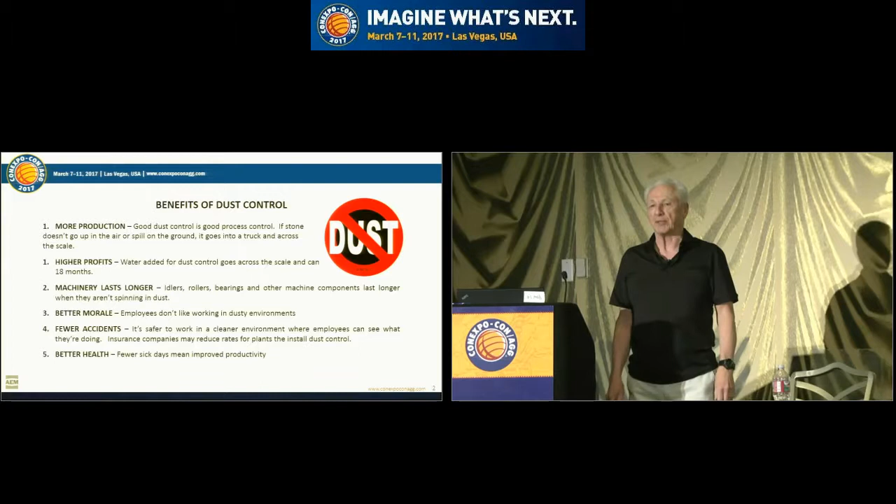First of all, you can get more production if you do this right. My belief is good dust control is nothing more than good process control. If it's not going up in the air or spilling on the ground, it's going to go into your truck, into a rail car, into a barge, and you're going to be able to sell it.

Secondly, higher profits. For example, if you're using a water spray system, that water is going to go across the scale, and that system could pay for itself in 18 months.

Machinery can last longer. I mean, you can't convince me that idlers and bearings and all those machine components run better in a dusty environment.

Better morale. I've been doing this for 30 years and I don't like going into these dusty old plants. I feel better when I got a nice, clean, safe working environment.

Fewer accidents. If you can see what you're doing, if your vision's not obscured by dust, you're going to work safer. And finally, better health. This stuff is no good for your lungs, and if you're healthier, you're going to have fewer sick days.

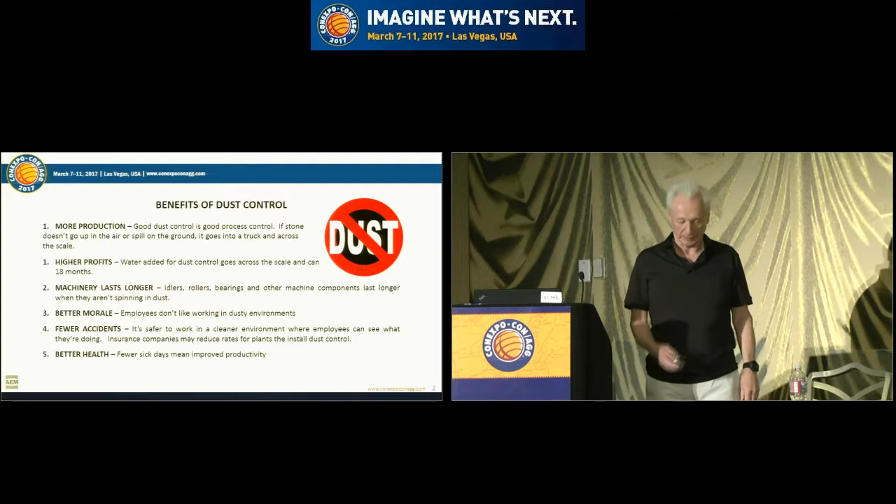So there's definitely some benefits here, and what I want to talk about today are some control methods from the point of view that good process control is nothing more than good dust control. So try to view this whole problem of dust control not in terms of complying with air quality standards, but as an engineering problem. How do you approach it from an engineering point of view? They're just two sides of the same coin.

Now, let me go back here a second. I'll tell you a story about a plant we put a system into in Missouri about 20 years ago. This old boy that owned the plant got slapped with a $40,000 fine for visible dust emissions.

So he figured he was going to sue the state. He was going to challenge their authority to regulate his emissions. Well, that didn't work out. He had to pay the $40,000 fine, and he had a $20,000 or $30,000 legal bill.

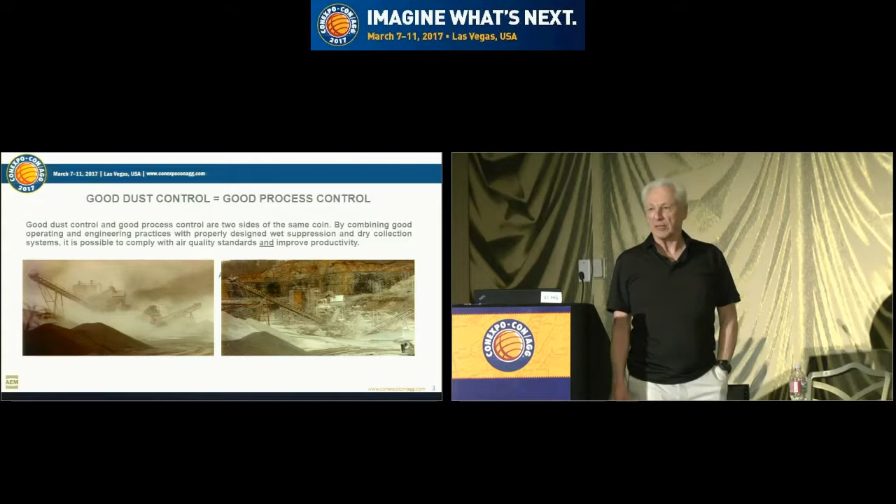And then he went to our dealer, and he said, you know what, I think I'm going to have to put one of them damn systems in. So we went down there, we installed it, and we finished up during the lunch hour. We had just turned that system on, and that plant went from looking like the one on the left to the one on the right.

So we were sitting in the lunchroom when Harlan came roaring up in his pickup truck, and he came into that lunchroom screaming, what the hell's wrong with the plant? What broke down? He said, well, Harlan, nothing broke down, there's just no dust. See, when he came back from lunch and didn't see that cloud of dust coming up from his plant, he thought the thing wasn't running anymore.

And he said, I want you guys to get the hell off my property. He says, I'm not going to turn that damn thing on again until I see the inspector coming down the road. So we said, okay, we got up, we left.

And I didn't hear from Harlan for another 6 months. I think it was March of the following year when he called me up to tell me that my damn system had broke down. He said, your pump cracked. And I said, well, the only way it could have cracked is if you guys forgot to drain it over the winter. You know, if you remember, you threw us off the property.

And not my fault if you guys didn't remember to drain the thing, but he wouldn't allow his people to touch the pump. So he wound up spending another $12,000 or $13,000 to repair the unit and finally get things in good working condition so he could comply with air quality standards.

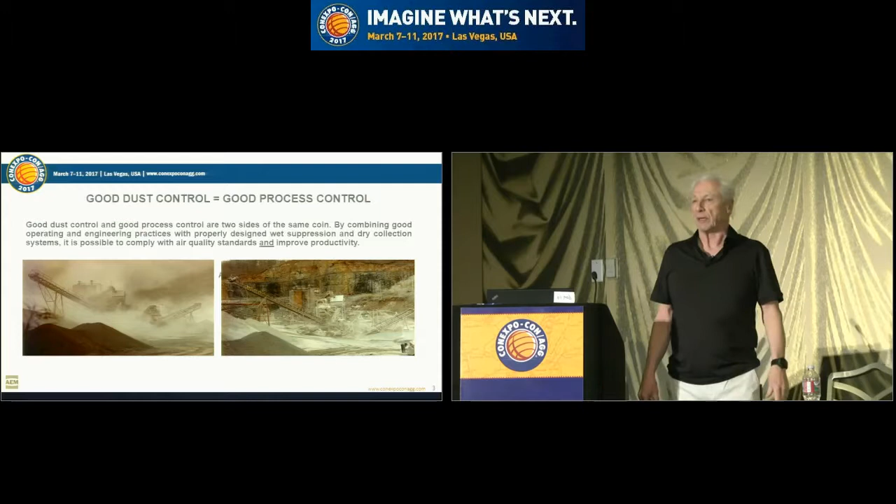So this guy wound up spending, I don't know, between fines and legal fees and the equipment, probably $120,000 to $150,000. And what I want to encourage you guys to do here today is don't wait for the last minute. Don't wait until you get that citation.

Don't wait until you get that fine, because I guarantee you'll wind up spending a lot more money than you need to on dust control. Try to get ahead of the curve. Try to develop a dust control plan.

You see that photo on the right-hand side. A quarry is a pretty complex operation. There's a lot going on there, a lot of dust sources. It's really difficult to figure out how you're going to control emissions from such a complex facility.

Where do I start? Well, the first thing you want to do is conduct a site survey. Where's that dust coming from? Get out there in the plant and list all the dust sources.

Secondly, you can estimate your uncontrolled dust emissions. How much dust would that plant produce if I didn't do anything to control it? How much dust would I get from the roads? From the piles? From the crushing and screening plant? You can estimate all that stuff and come up with a baseline of uncontrolled emissions.

And then you can sit down and put together a list of control measures, and pick the ones that are appropriate for your facility. It could be a simple enclosure, could be a spray system, could be a baghouse, could be some skirting, could be a dust curtain, whatever.

List all that stuff, and by doing so you're able to prioritize these dust sources. Your site survey and your calculations have told you which are the most prominent sources, so you can approach the problem by tackling the big, most prominent sources first and leaving the smaller ones for later.

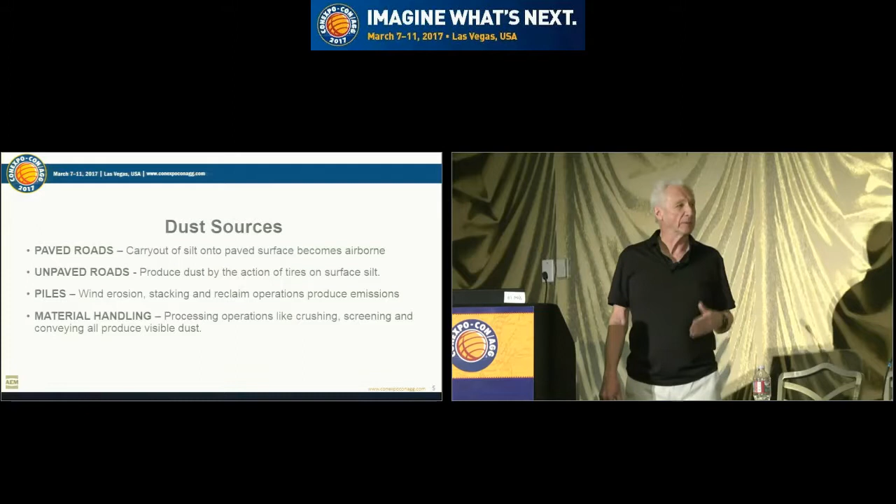Generally speaking, paved and unpaved roads account for roughly 35% of dust coming off a typical quarry property, piles for probably another 20 to 30%, and material handling for the balance. So it's a pretty even mix, but again that's going to depend upon your particular situation. Everybody's a little bit different.

Now, every state except California, I believe, allows you to use what are called reasonably available controls. And these are nothing more than common sense control measures—stuff you've read about in the literature, stuff you've heard about by coming to seminars like this, things you've learned by talking to your buddies in the industry and what they've done to control emissions.

And I've divided them here into 4 categories. First you got operational controls. All you're doing here is teaching people how to do things differently—teaching your operators how to minimize dust. Doesn't cost you a nickel.

There's a right way and a wrong way to load a truck. There's a right way and a wrong way to dump a truck. There's a right way and a wrong way to operate a crusher. If you don't do it right, you're going to produce more dust than you need to. But it all has to do with training.

You've got to get your operators to take personal responsibility for controlling dust, and this can really make a big difference. And it doesn't cost you anything.

Number two are engineered controls. These are generally things you can do with in-house labor and material. By engineered controls, I mean controls that enable you to enclose and contain dust sources. You can get some old conveyor belt and steel sitting in your boneyard that you can use to button up a transfer point, patch up a couple holes, or improve the skirting on a transfer point. All that stuff can make a real big difference.

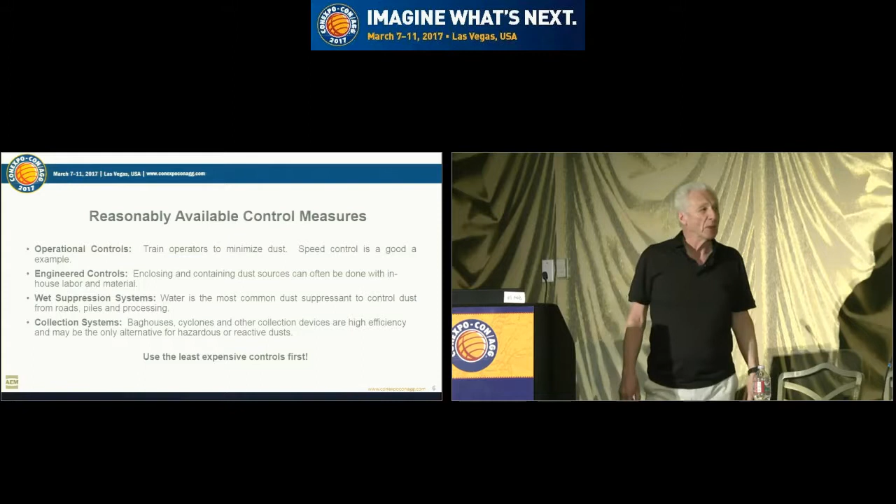Wet suppression systems - water is the most common dust suppressant used to control dust from roads, piles, and all kinds of processing operations. And then at the top of the heap, the most expensive, you've got collection systems - bag houses, cyclones, other collection devices. They are very high efficiency, and they may be the only alternative for hazardous or reactive dust. But these are the kinds of things you don't want to have to do unless you have to.

So let's take a look at reasonably available control measures for each one of these sources. First, let's take a look at paved roads. Number one, housekeeping - keep the roads clean. If something gets spilled on them, clean it up before it gets tracked off the property. What you want to try to do is prevent carryout. The reason you're getting dust emissions from that paved surface is because that surface has gotten dirty.

Carryout from unpaved roads - vehicles track material out onto that paved surface. So some of the things you can do from an operational point of view: you can restrict access to paved roads. If you've got five or six unpaved roads coming into a piece of paved road, see if you can narrow that down to two. Try to restrict the types of vehicles you have traveling on the road.

Rumble grates can be used to loosen and remove rock with that transition when you're going from an unpaved to a paved surface. And we'll be talking a little bit later about wheel washes, how they can be used to clean truck tires before they enter the paved surface.

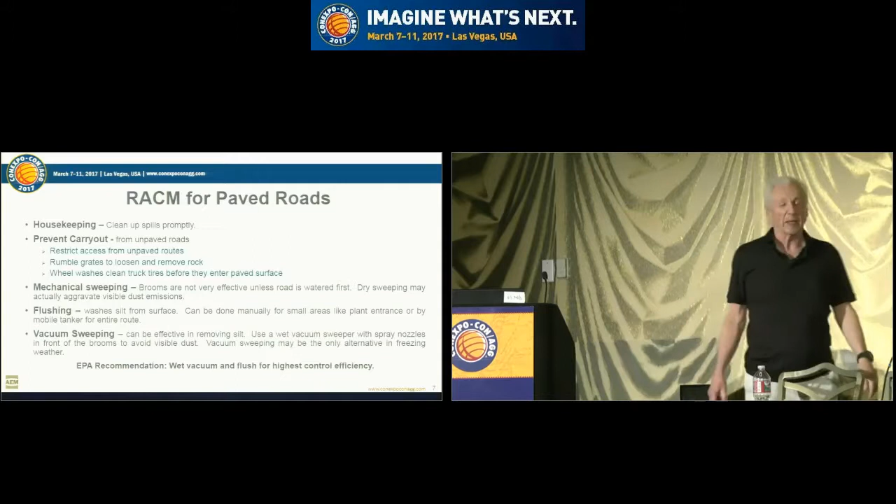Mechanical sweeping - brooms and that type of stuff really aren't very effective unless the road has been watered beforehand. Dry sweeping can sometimes actually aggravate visible dust emissions. Flushing washes the silt from the surface. And I'm not talking about having a tanker with a spray bar wet down the surface - I'm talking about actually flushing the silt off the surface. If you just water down that paved surface, as soon as that water evaporates, that silt's going to remain there. You want to try to flush the silt from the surface.

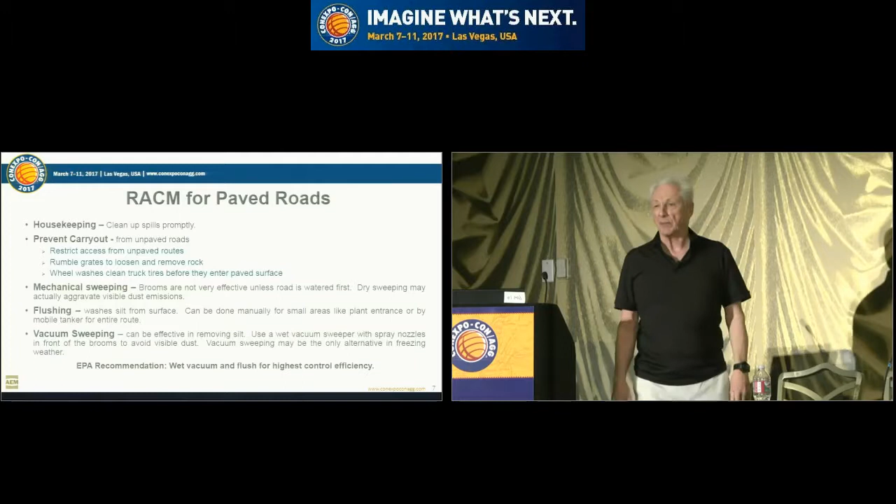That can be done manually for small areas, like maybe a plant entrance, or with a mobile tanker. Vacuum sweeping is the most effective method. Probably a lot of you folks already employ a contract sweeper - it comes around, does your roads, with little brooms out in front and a couple of spray nozzles to keep the dust down. In vacuum sweeping, if you're in a cold weather climate, like my area back in New York, it's probably the only alternative in cold or freezing weather. What the EPA recommends is wet vacuum and flush for the highest control efficiency - that'll give you, I think, 97 to 98% control efficiency on a paved surface.

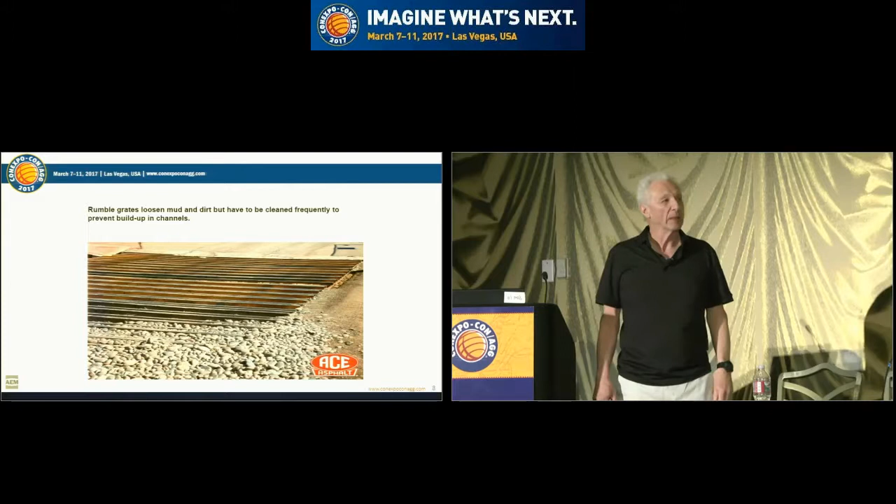Down here in Southern California, they passed a rule several years ago called Rule 1157, where every affected facility had to install a rumble grate and a wheel wash. Problem with that rule was it didn't say it had to work. So a lot of guys put in these rumble grates, but they never kept them clean, and they still complied with the letter of the law. You just dig a little hole and fill it with water - you've got a puddle of water, and you're basically in compliance. There's no performance standard.

But it depends on the area you're in. If you're out in the middle of nowhere, maybe you don't need to do anything. Maybe you're in an agricultural area where the farmers are tracking out more stuff than you are. If you're in a metropolitan area, though, you can be really under the gun, and you may have to install a wheel wash.

There's two basic types. Number one, you got basins. Vehicles drive through a flooded basin. These can work well as long as they're properly maintained, and you got a way to clean out that basin to keep rock and silt from accumulating. The two biggest problems with this are keeping them clean and recirculating the water. If you're not able to recirculate and clean up that water, you wind up washing with muddy water, and it just don't solve anything.

Second type would be a pressurized spray system. Vehicles drive through some sort of wash zone. Sprays could be anywhere from 40 to a couple hundred pounds of pressure. There's all kinds of designs for these wheel washes. Water can drain to a storm sewer, retention pond, or some other kind of basin.

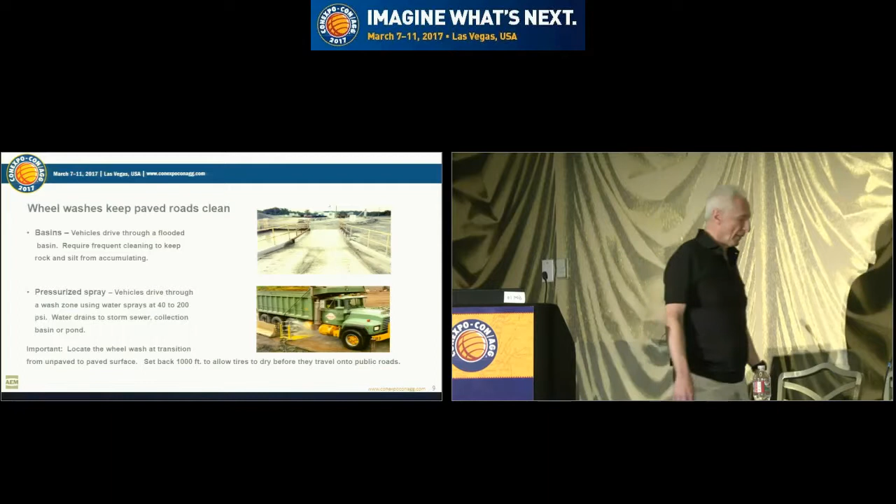All of these wheel washes work. The biggest problem with these wheel washes are, number one, getting the trucks to drive through them. If you're going to put one of these things in, you got to make sure there's no way a truck can get around them, because they will. Number two is keeping their speed down, because these guys will go through there as quick as they can. And if they just blow through a wheel wash, you're not going to be able to do a very efficient job of washing it. And then number three, you want to try to locate the wheel wash as far back in the plant as you can.

If you have a scale house that's 800 to 1,000 feet back from the public roadway and you got paved road from that scale out to the public road, those tires that get washed in that wheel wash, they're going to be dry by the time they get out onto that public road. On the other hand, if your scale is right there and it's 50, 60 feet to the plant exit, you're going to track out a slick of water. I mean, the tires are going to look visibly clean. That slick of water is going to get tracked out of the plant and maybe extend for a couple hundred feet on either side of the plant exit.

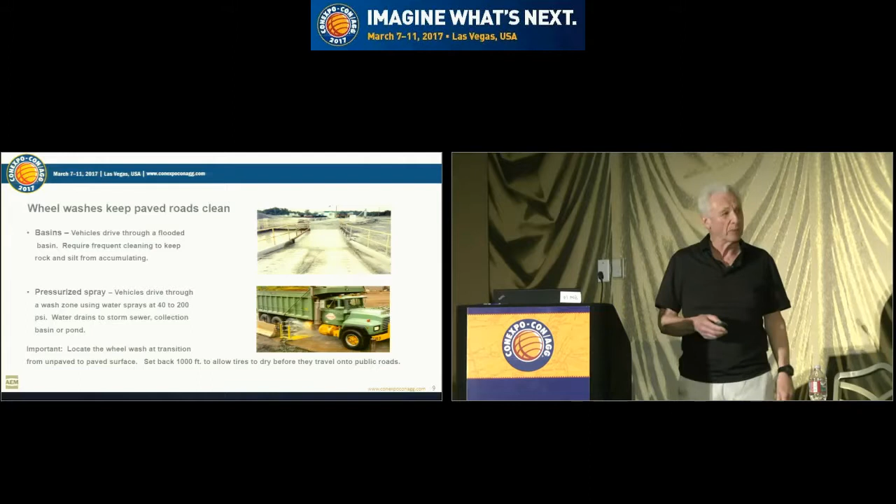When that water dries, it's going to leave behind this microscopic silt, and then passing traffic is going to cause that to be re-entrained. So when you drive up to the plant in the early morning or in the evening when the sun is behind that stuff, it can look pretty nasty. So try to locate that wheel wash at a transition point from unpaved to paved surface. Once those truck tires are clean, you don't want them going onto an unpaved surface. So once they're clean, they got to stay on pavement. And again, try to set them back about 1,000 feet, 800 to 1,000 feet to allow tires to dry before they travel onto a public road.

Some folks use flocculants. That's fine. All this stuff works. The big problem, again, is maintenance.

Okay, unpaved roads. Speed control. Lower speed means less dust. It's just common sense. Here's an example of an operational control that can really determine whether or not you're going to have a problem with your unpaved road surfaces. For haul vehicles, it can be kind of tough to keep speeds down. You've got to get them up to the primary crusher in a certain period of time or you're going to run out of rock.

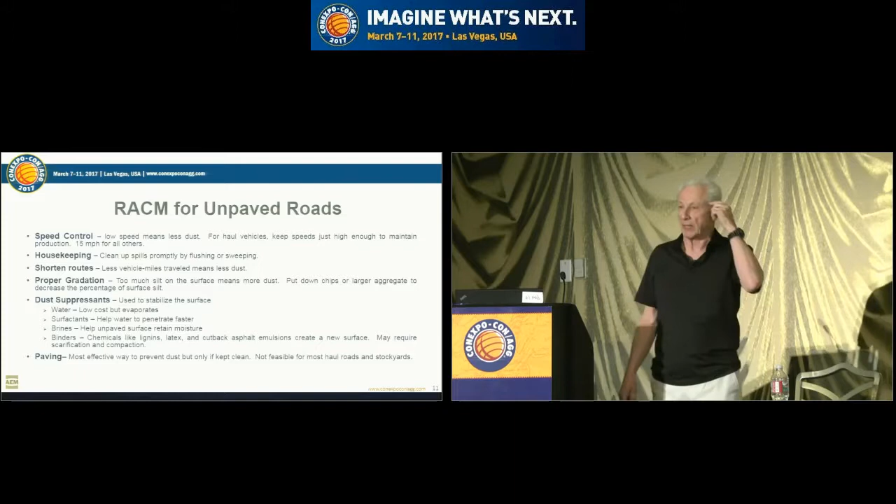On the other hand, I've been in plants where I've seen guys load up at the face and blow 45 miles an hour down to that primary crusher with a trail of dust behind them, and then they'll sit there at that crusher for 5 or 10 minutes waiting to unload. You got to train those guys. Keep your speed less than 15 miles an hour if it's possible.

If you don't have enough trucks, try to do the best job you can. Housekeeping, again, even though it's an unpaved road, if you spill something on it, try to keep the road clean and free from spillage. Shorten the routes. If there's any way you can shorten the routes that trucks travel in your plant, that's going to mean less vehicle miles traveled, and that's going to mean less annual dust emissions over a year's period.

Proper gradation, this is something that's often ignored. The reason you got a problem with visible dust from a road surface is because there's just too much silt, too much minus 200 mesh material on that surface. Maybe you could put down some chips or some larger aggregate that would decrease the percent of silt on that surface, and that might just solve your problem.

If you still got a problem after doing all that, then you can take a look at dust suppressants. So again, we're trying to move from low cost, low efficiency to more expensive stuff. To the extent that you can control speeds, you've got good housekeeping, you've shortened the routes, and you've taken a look at gradation on your road surface, you can decrease your reliance on dust suppressants.

Water is the workhorse of dust control on unpaved roads. Low cost, but it evaporates. If you're in the Gulf Coast area, in Houston, where the humidity can be 80, 95, almost 100%, you can water a road and it might last all day. If you're out here in Las Vegas and it's 118 degrees, that water's going to be gone in an hour, hour and a half, and you might have to have a water tanker going around that plant continuously to keep the dust down.

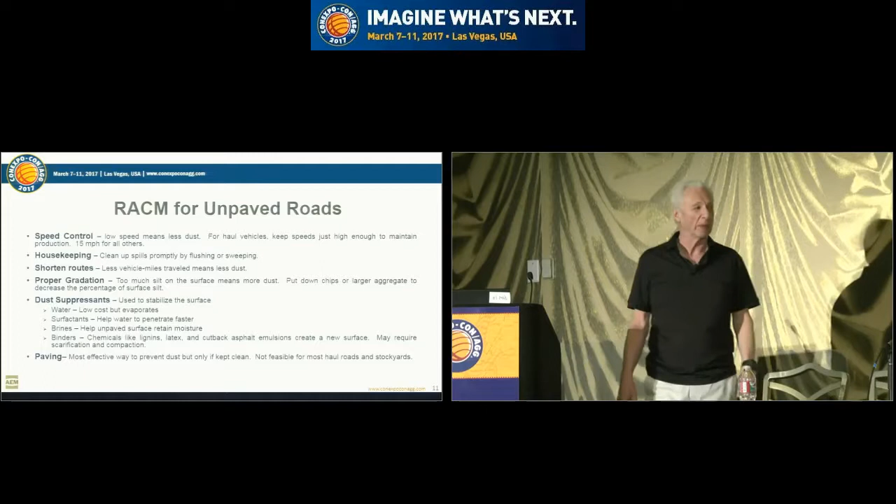Cutback asphalt emulsions really work pretty good. I just encourage you to contact your state DOT. A lot of the DOTs have a list of approved dust suppressants. If there's any way that you can use a waste product, if you're in a major metropolitan area where you've got some steel mills or a pulp and paper mill, maybe you can get some waste product that would be suitable as a road dust suppressant. There's all kinds of vendors that sell these chemicals.

It's a very competitive market. If you're thinking about using an additive, it might pay to have one of these vendors come in and do it. Maybe they give you a free trial for a couple of months, and then you bring another vendor in for another couple of months. You might go for a year or two doing free trials until you find a product that's going to work for you.

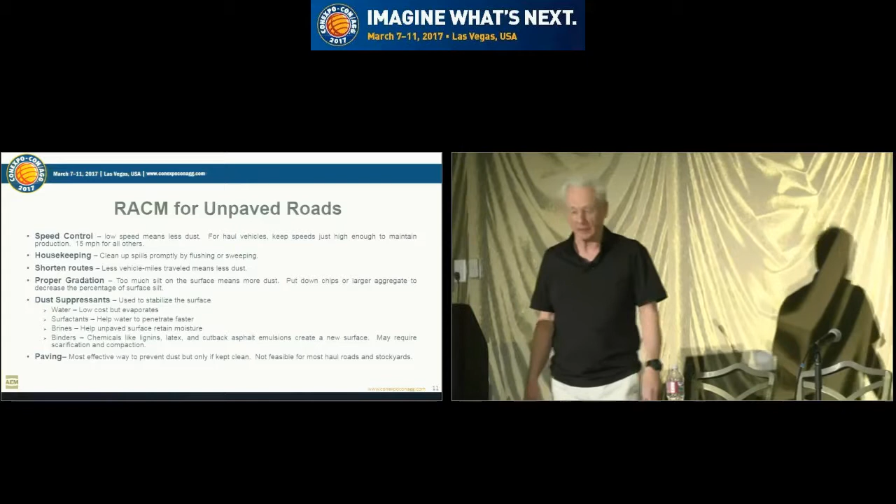If none of this stuff works, you're going to have to pave it. That sounds a little extreme, but it's been done. There's a quarry in Newington, Connecticut that sits right in the middle of the little town, and they had all kinds of problems with their neighbors, so they wound up paving that whole quarry. If you're driving in there to pick up stone, you're on pavement.

All the piles got concrete barricade blocks around them to prevent material from spilling out onto that paved surface. If you're loading up there, the loader comes over to the pile, takes a cut and lifts his bucket, and if they see visible dust, that operator's instructed to call the water tanker, who'll come down and water that pile before they load the truck out. It can get pretty nasty depending on who your neighbors are.

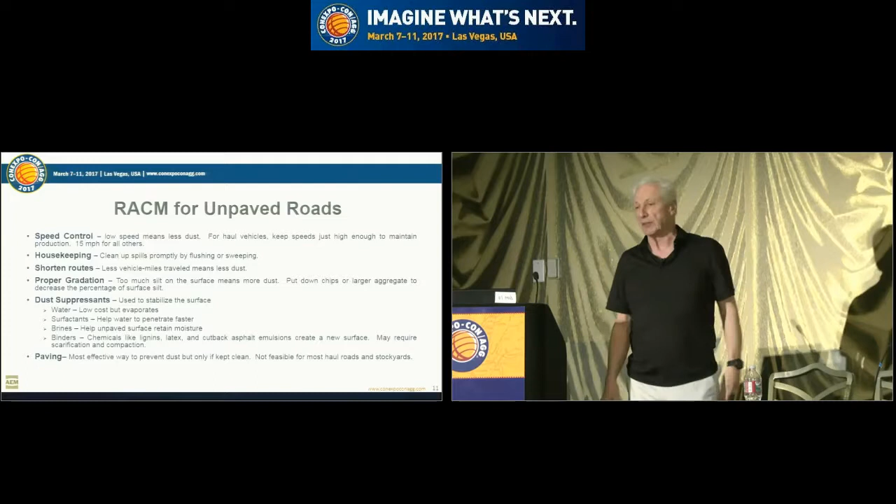Obviously paving's not feasible for haul roads and most stockyards. That quarry up in Connecticut is the only one I've ever seen pave their yard area. Higher silt contents and higher vehicle speeds increase visible dust, so again, it's important to take a look at the gradation of that road surface and train your operators to keep those speeds down.

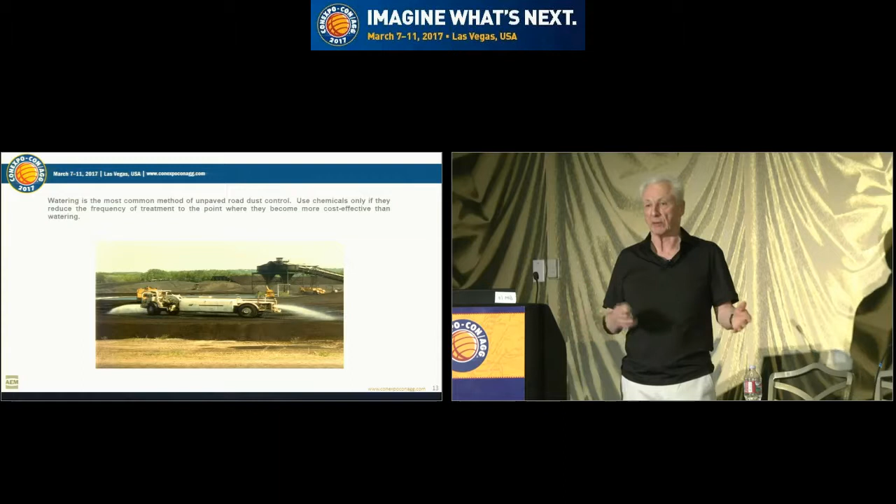Watering is the most common method of controlling road dust. If you're thinking about using a chemical, I'd encourage you to take a look at whether or not that chemical can reduce the frequency of treatment to the point where it becomes more cost effective than water. You can calculate how much you're spending to have a guy in a tanker go around and water those road surfaces. If you can find a chemical that can reduce the amount of treatment to the point where it's more cost effective than water, then it makes sense to use it. And if it can't, then it doesn't. So it's all a matter of economics.

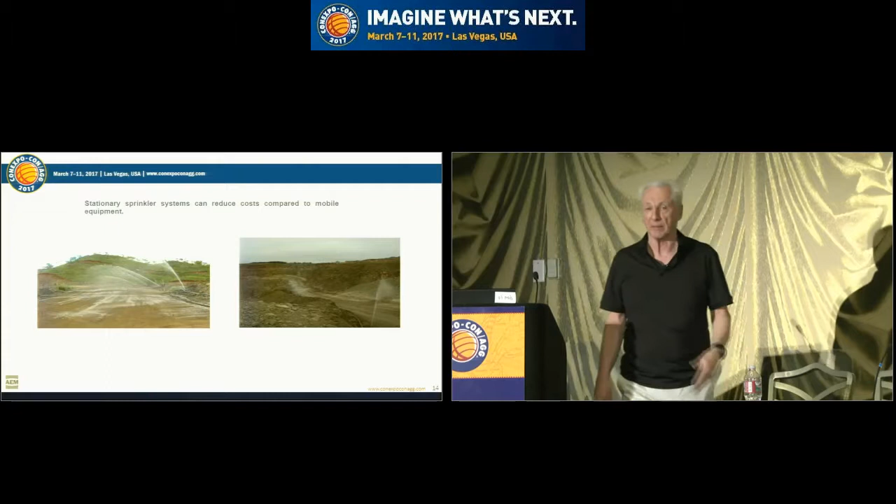I see more and more people going to stationary sprinkler systems. It could cost you 60, 80, 90, maybe even $100,000 to have a guy in a mobile tanker driving around that plant all the time. More and more folks have gone to these stationary sprinkler systems. As you can see from these photographs, they're not anything fancy. Luck Stone in Virginia put in a couple of these, very sophisticated, and they work well, and they pay for themselves. You eliminate that water tanker, and now you've got an operator who can get on to some more productive work.

Control measures for piles. Number one, you've got methods to protect the pile surface. And again, training: instruct operators to minimize dust. If you're loading out a truck, you go into that pile, get that loader bucket in there, and lift it up.

Then let it sit there, let that material spill back on the pile. You don't want to overload that bucket and race over to the truck, spilling stuff everywhere before you dump it in. Try to do it carefully. It don't sound like it's going to make much of a difference, but believe me, it does. Your operators have got to take personal responsibility for minimizing dust. We usually find that it's also better to dump into a truck as quickly as you can, because in the aggregate, you actually get less visible dust, less emissions up into the air.

Minimizing pile height is another example of what I call an operational control measure. If you can keep those pile heights less than 10 meters, about 33 feet, you're going to have less wind erosion. Once you get over 10 meters, you get into what they call the winds aloft, where wind speed is very much accelerated and wind erosion is aggravated.

Engineering-wise, if there's any way you can shelter that pile from the wind, if you can put it down in the pit or on the lee side of a hill or a berm, that's going to reduce wind speed across that pile surface, and that's going to help.

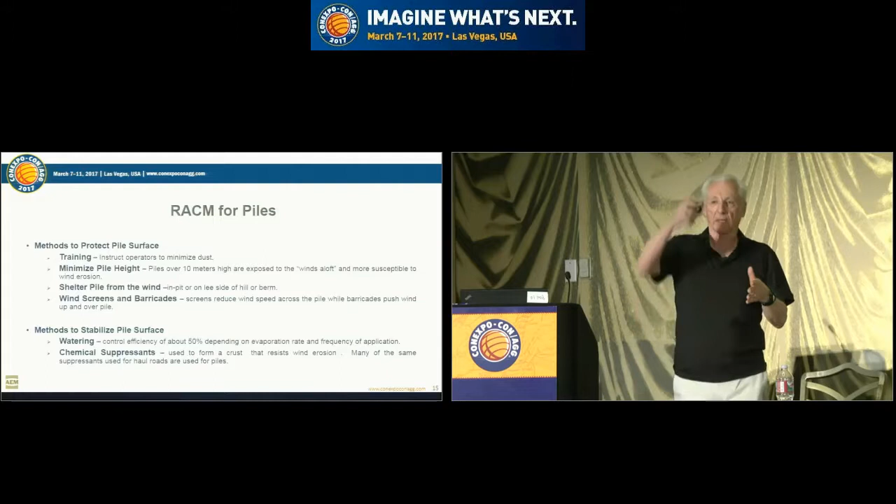Number two, you've got methods to stabilize the pile surface. These are the same kind of control measures you'd use for unpaved roads. You can water the pile down, but control efficiency isn't very high because in most aggregate processing operations, these piles are really active, and that also limits your ability to use chemical suppressants.

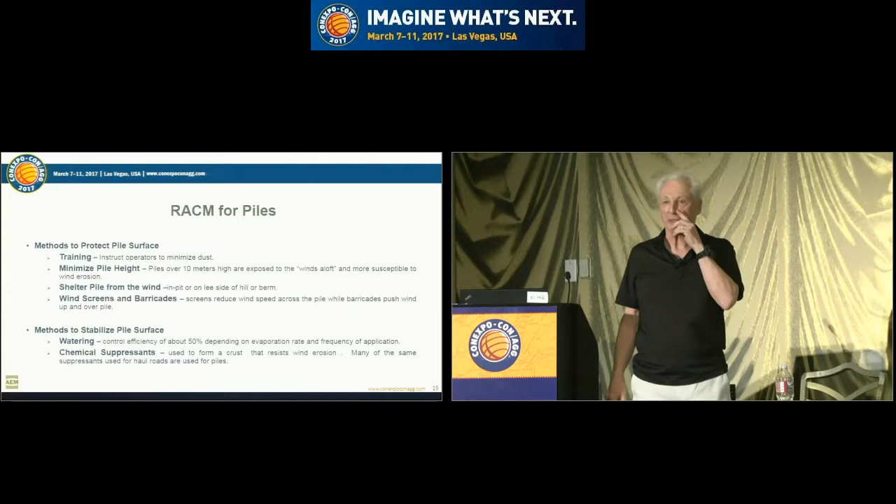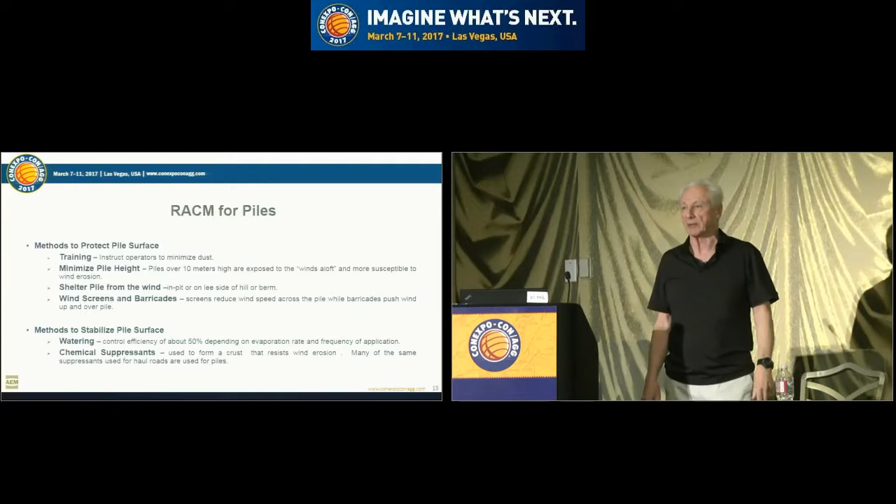Coal plants, for example, power plants, can purchase coal and put it into dead storage for 10 years. They'll slap a bunch of binders on the surface and seal it against wind erosion, but you can't do that in most aggregate plants because those piles are too active. On the other hand, I've seen some plants with enormous piles of fines, screenings they can't get rid of - that can be a real problem with wind erosion. If you've got a situation like that, it might be worth looking at some chemical suppressant to permanently coat that surface. I've even seen people hydroseed them, grow grass and weeds on them to keep the dust down.

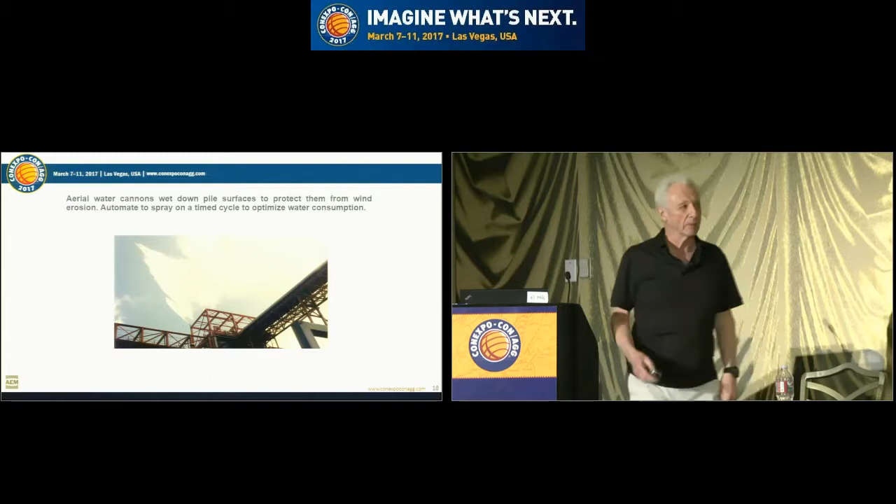The problem with these things is when you need them most, they're least effective, and that's on a windy day. You get wind speeds up above 15, 25 miles an hour, how are you going to keep that fog targeted on the pile? Maybe you have to use an array of them. I don't know, but it can be difficult to use these things on a windy day.

They were originally developed for demolition work. If you're taking down a hospital or a department store or an apartment complex, and you've got your hammer banging that stuff down, they use these things to control dust during demolition activities. That was where these things got their start, and they've been generalized to include other applications like piles.

Okay, so that takes care of roads and piles. Let's talk about material handling and processing.

Again, the first thing you want to do is implement good operating practices. Train operators to take personal responsibility for minimizing dust. I cannot emphasize how important this is.

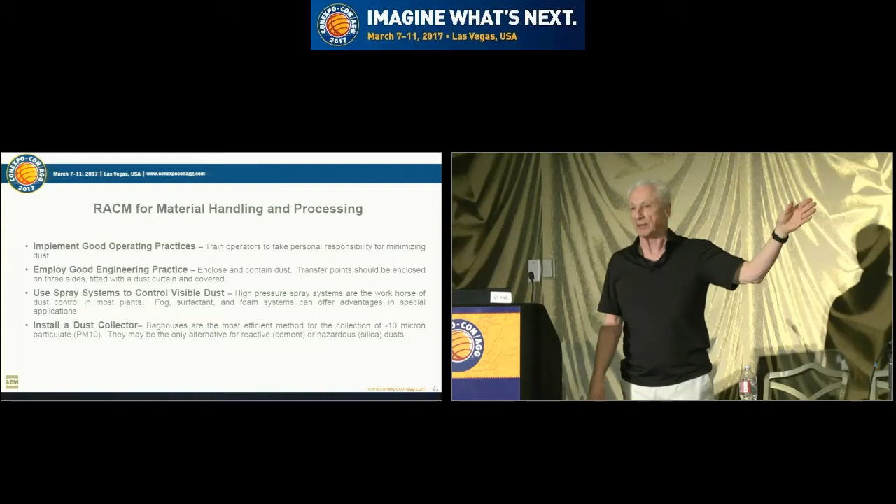So I'm standing there with the plant manager, and we're watching this thing work, when all of a sudden this big puff of dust goes up behind one of the warehouses. Well, what the hell's going on there?

It turns out some truck driver came in there. His buddy was the loader operator. He didn't want to wait in line to go through that enclosed facility, it just took too damn long. He was in a big hurry, so he said, why don't you just meet me in back of the warehouse over there? I just need a little bit of stuff, you just load me up and I'll get the hell out of here.

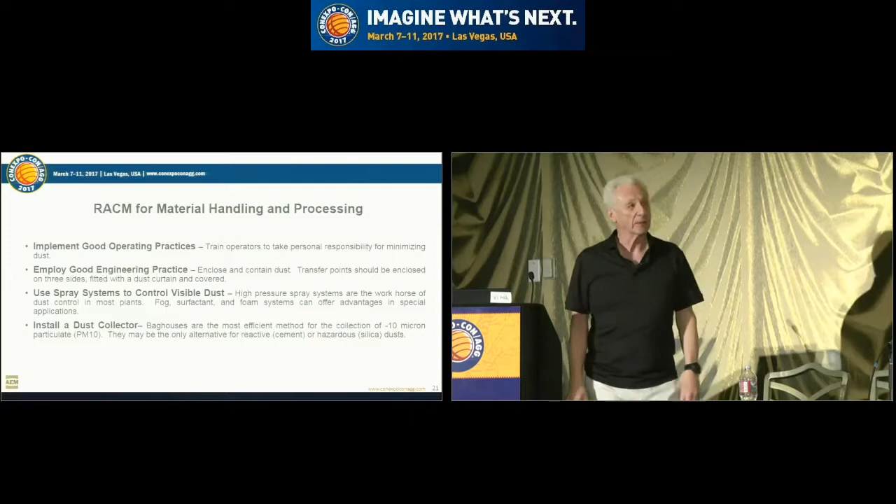So they did. The only problem was an inspector from the Pennsylvania DNR just happened to be driving past the plant, and he spun in there and wrote him a $10,000 ticket. They'd done everything they were supposed to do, spent all the money they were supposed to spend. They complied in every way with that consent order. But they had an operator that was just dumber than a box of rocks, and he decided he wasn't going to do it. And that's 10 grand.

All because they had an operator who didn't take personal responsibility for minimizing dust. So it can make a big difference.

Okay, good engineering practice: enclose and contain dust. Transfer points should be enclosed on 3 sides, fitted with a dust curtain, and covered.

Once you do all that from an operational and engineering point of view, then you take a look at spray systems to control visible dust. There's high pressure spray systems, these are probably the workhorse of the industry. You've got fog systems, surfactant systems, foam systems. There's a lot of different stuff out there. All this works as long as you've selected it for the appropriate application.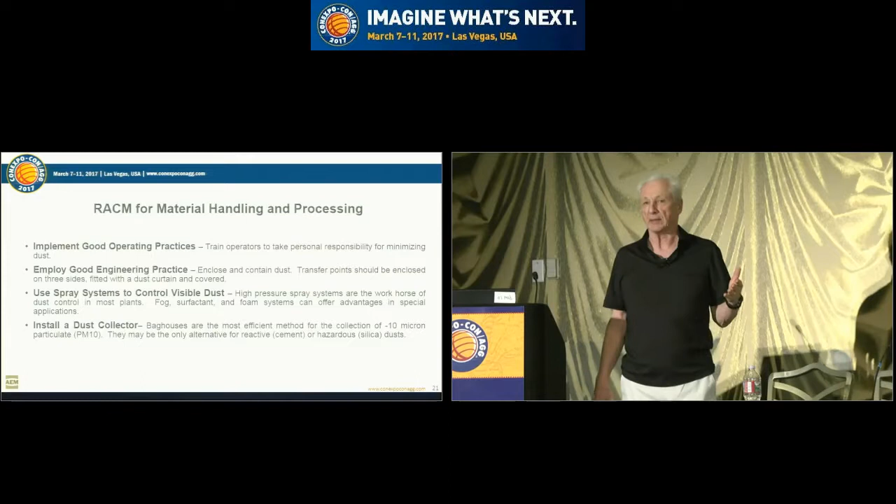And then finally, if none of that stuff works, you might be stuck with a dust collector. Bag houses are the most efficient method for collecting the -10 micron, the PM10, the respirable dust, and they may be the only alternative for reactive or particularly hazardous dust. Like if you've got a material with a real high silica content, you may have to use a bag house because it can be a very hazardous dust.

Now believe it or not, good dust control and good process control are not mutually exclusive. Good operating practice can help to minimize dust and actually improve production. Here's 2 examples. Number 1, choke feed crushers. Crushers make a lot less dust when they're choke fed. Good for production, good for dust control.

And this is particularly true of impact crushers, especially vertical shaft machines. Now, if you've got a vertical shaft machine that's running 30-40% of capacity, it's just a big fan, and it's almost impossible to knock that dust down. So try to choke feed these crushers, just jam as much material as you can through them. Good for production, good for dust control.

Number 2, try to avoid interruptions in process flow. I've seen some plants that are just like Frankenstein plants, just a big mismatch of equipment. You got an impactor that's got a capacity of 800 tons an hour, but you got a really good deal on that scalping screen, and it's only rated for 300 tons an hour. So there's the bottleneck, now you got to run that impactor at 300 tons an hour when it really wants to see 800, and it's just blowing dust. So maybe you're going to shut that down, maybe you just run a bunch of material through there.

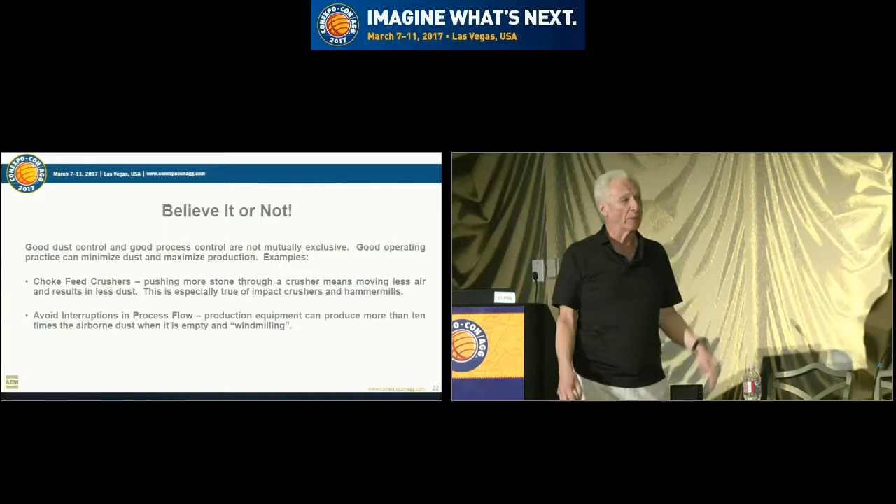And when it runs out, you wind up with equipment that's windmilling. When equipment is windmilling, when those impactors are running empty, usually you see this when you can't get rock up to a primary crusher in enough time.

You've got a primary impactor, you only got one truck. He comes up there and dumps a load of stone through that machine, then there ain't no other truck for maybe another 8 or 10 minutes. And all that time, that crusher's just spinning, and emissions can increase tenfold when that machine is windmilling.

So try to avoid interruptions in process flow, okay? And again, that's good for production. You want that plant just to be humming along.

Good engineering practice. Here's some examples of enclosures. You want to enclose transfer points on 3 sides and put a cover on it. You want to have a dust curtain at the discharge to a conveyor, and you want to install dust skirts that provide a nice tight seal to the conveyor. You may have to use dual skirts in some instances.

Landscaping, I think this is something that's often overlooked. I think one reason you see more people putting the plants in pit is because they're out of sight, out of mind. If the public can't see them, they're not going to complain about them.

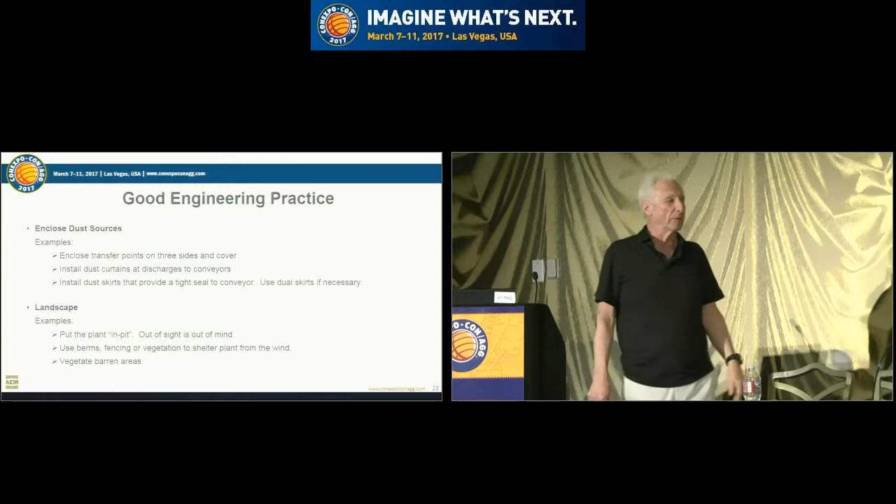Again, you can use berms, fencing, or vegetation to shelter the plant from wind. If you're putting in a new plant, take a look at the topography you're dealing with. Is there any way you can arrange that plant so it's going to be somewhat sheltered from the wind? And then you can also vegetate barren areas.

Out here in the desert Southwest, you get these little dust devils. If you got areas in the plant that are barren, maybe just dump some aggregate on top of them, or maybe you can find something that'll grow there to help stabilize that surface and keep the dust down.

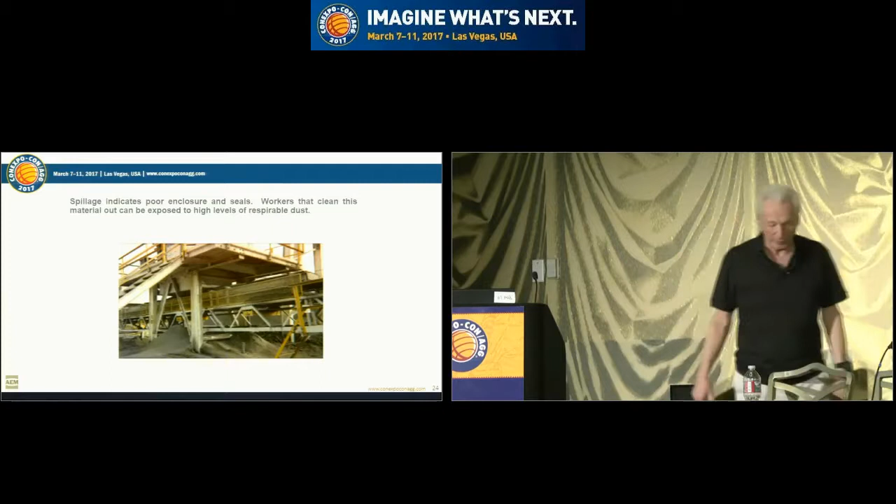So if you got an area that looks like this, if you got spillage underneath a screen tower that looks like that, that indicates poor enclosure, poor seals. Workers that have to clean that kind of material out, that's when they really get a nose full of dust. The poor slob that's got to go in there and shovel or bobcat that out, that's when he really gets a good dose of dust. It ain't a fun job.

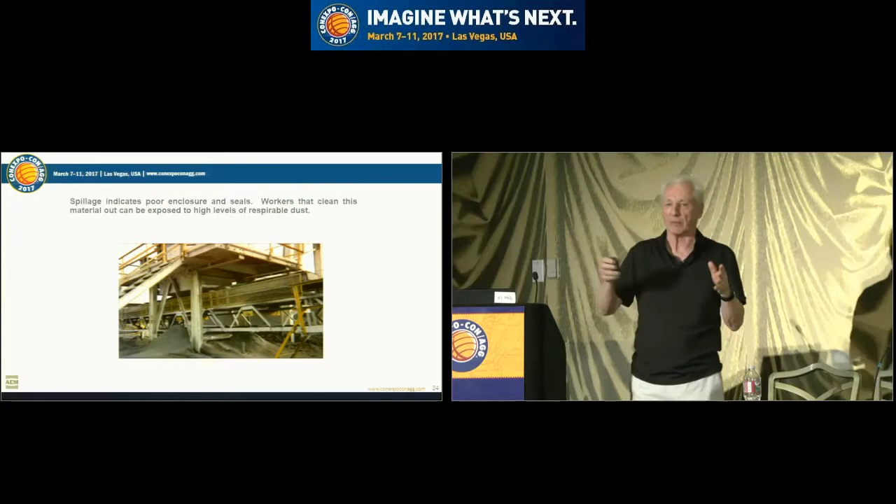We deal with a lot of new construction, and the problem is when you get down to the short hairs, well, we could put that skirting in, but we're not gonna do that. We're not gonna put the canopy in. We're not gonna build it 10 feet out, we're gonna build it 5 feet out. We're going to try to shorten the conveyor lengths to save some money, but now we're loading too close to the tail pulley and you can't get a good rear seal. All that kind of stuff leads to spillage.

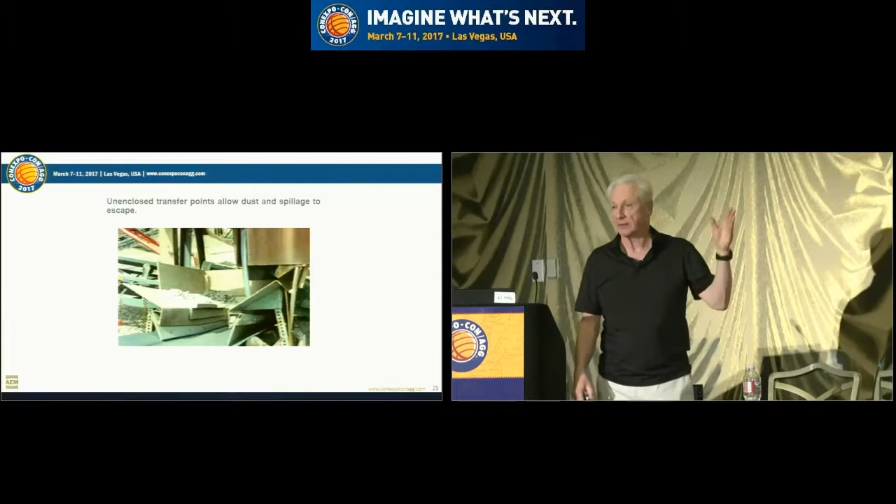More likely, skirts are worn out, haven't been replaced. You get gaps that material can leak out of, and you wind up with something that creates a lot of spillage. Here's an example of an unenclosed transfer point. They just allow dust and spillage to escape all over. You can see a couple inches of daylight underneath that skirt board.

You can put a spray system in here that's going to control dust. You can inundate that area with water, okay, but that's just going to make a wet mess.

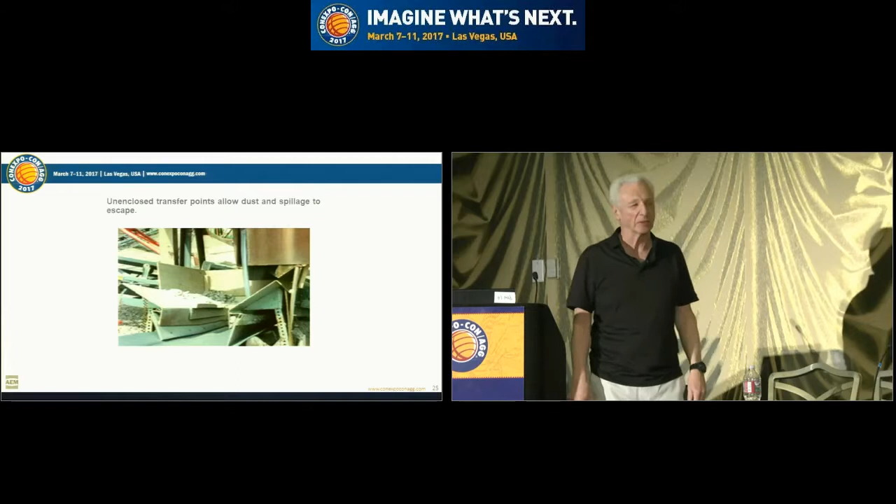There's several multi-layer sealing systems on the market now. They consist of a single edge skirt, and then they have a flexible rubber that folds out against the conveyor, so that even if you got a little sag in between the idlers, it's going to maintain a real good seal.

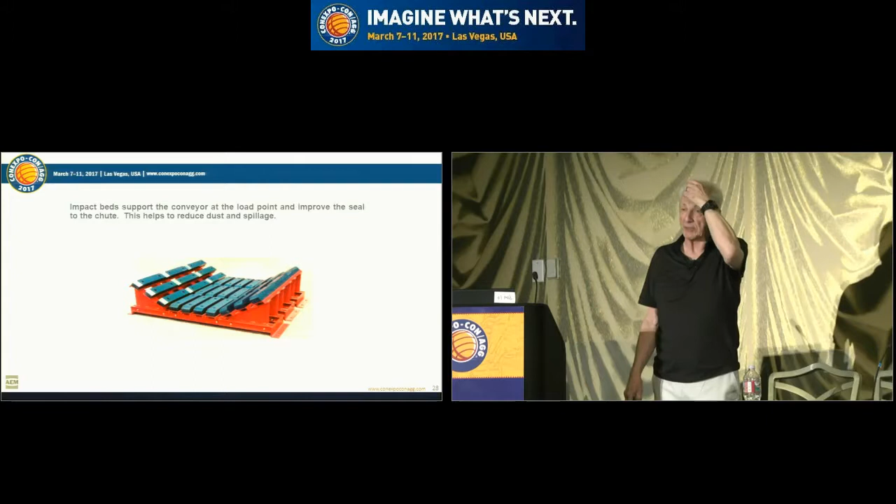Impact beds. We see more and more people putting these impact beds in. One advantage is it helps give you a nice, uniform, flat loading profile, and you get a much better seal with your skirts. You've eliminated those idlers where you can get sag, which leaks dust and spillage. These impact beds are something we highly recommend, another example of an engineered control.

So you don't have to add that nasty water that's going to muck up your screens. Conveyor covers can help reduce dust emissions and protect the material from the elements. All this stuff is a big help. Something like this is something the public can see, and it looks good when you've got all your conveyors covered.

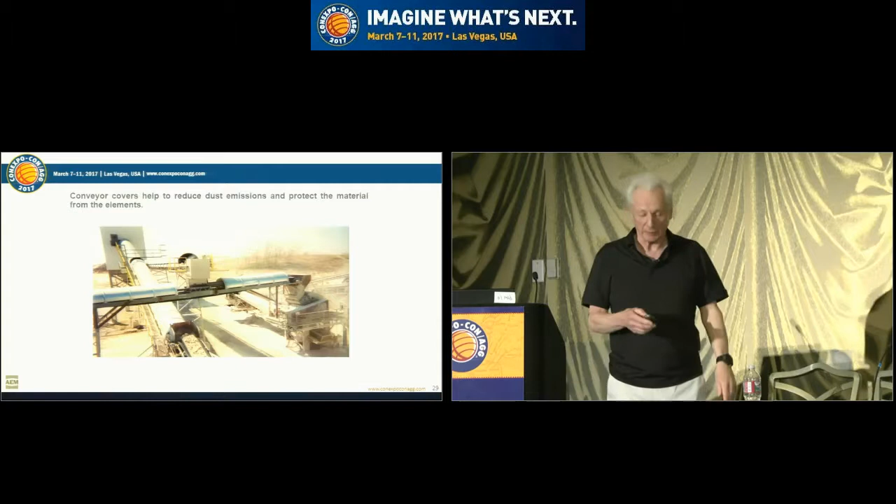All right, let's now take a look at wet suppression systems. The advantages of wet suppression systems are, first of all, low capital costs. We're not talking about equipment that's particularly expensive. Generally low maintenance. Basically all you've got to do is keep an eye on the nozzles and an eye on the filters. Pretty simple. And they prevent dust by reducing the potential of the substrate to emit particles.

When I add water to stone, it becomes less dusty. The idea here is to install a spray system that's going to atomize the water into droplets small enough to suppress airborne dust, but also add a small amount of moisture to the substrate, so it reduces its potential to produce dust downstream.

Disadvantages: it can cause wet handling problems, belt carryback, screen blinding. Too much water can throw products out of spec, carrying too many fines over. It may increase crusher wear if you use too much water. Water spray systems can't be used on water-soluble materials like phosphate, trona, or reactive materials like cement clinker. And they're hard to use in freezing weather.

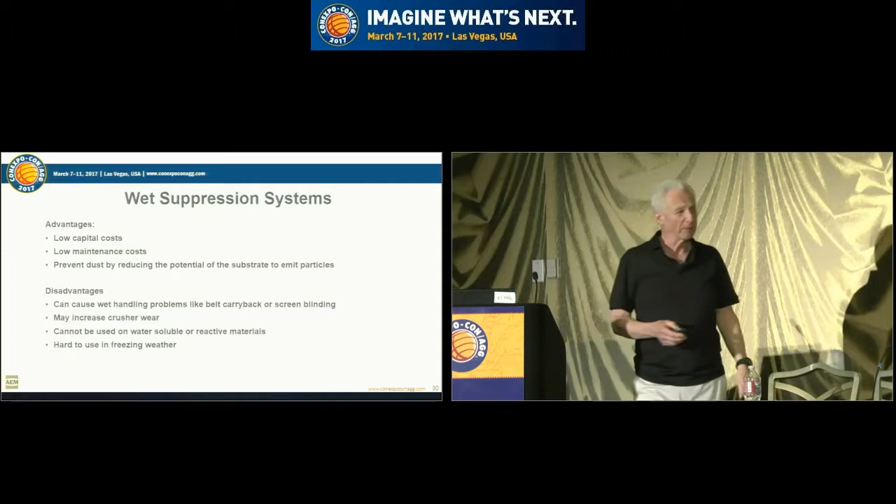As a practical matter, a conventional spray system you could probably use down into the 20 to 25 degree Fahrenheit range. Much below that, those nozzle tips just start freezing up. So it can be really tough if you've got to run 24/7 in a cold weather environment.

Types of spray systems for roads and piles: first of all, you've got water tankers, used to water unpaved road surfaces and flush paved surfaces. Water cannons, stationary cannons can be used to water piles down. Water tankers equipped with a cannon, like I showed you in that one photo, can be used to water piles, clean off production equipment, and flush off paved roads.

Stationary sprinkler systems — again, these can be simple manual systems where you go out to Lowe's or Home Depot, get yourself a bunch of little rain birds and hook them up. Or they can be automated; you can get pretty sophisticated with this, hook them into a weather station. They can be more cost effective than mobile tankers for longer unpaved routes.

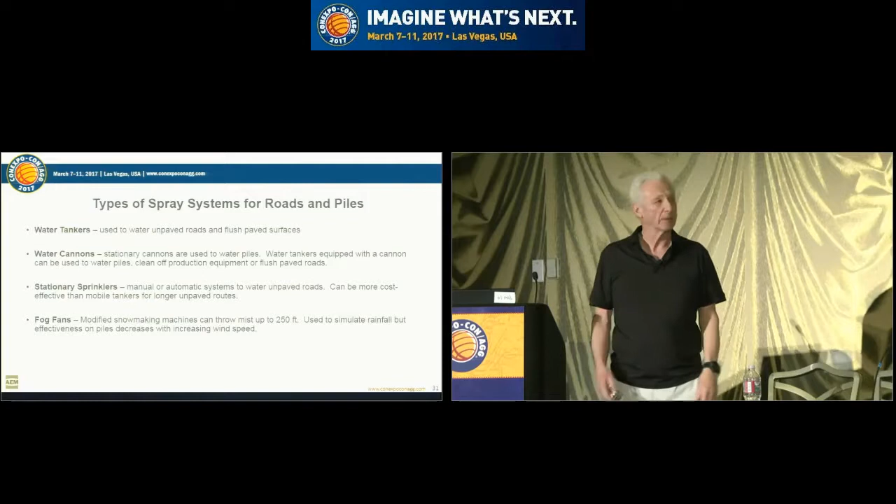And then those fog fans that I showed you — these are modified snowmaking machines. They can throw that mist a pretty good distance, and they can be used to control dust from roads and piles. Whether or not, try to use the least expensive thing first. Every plant's a little bit different. Just because a guy down the street's got a fog fan that works for him doesn't necessarily mean it's going to work for you. Every quarry's a little bit different.

Now when it comes to aggregate processing, material handling and processing, you've got 5 commercially significant systems available. First, the water spray systems. These produce an atomized spray to suppress airborne dust and add a little bit of water to prevent emissions downstream. These are water spray systems you're all familiar with.

But they require a real high degree of enclosure. If you were going to install one of these fog systems, you need a high degree of enclosure so you can create a dead air space where those fog droplets and the dust particles can come into contact and settle out. You need real clean water because you're using really, really fine nozzles, and now you've got a pump that's a positive displacement type, so it's going to require some regular maintenance. For a conventional water spray system, these are generally centrifugal pumps that are self-lubricating and don't require any regular maintenance, so these fog systems can be a bit trickier.

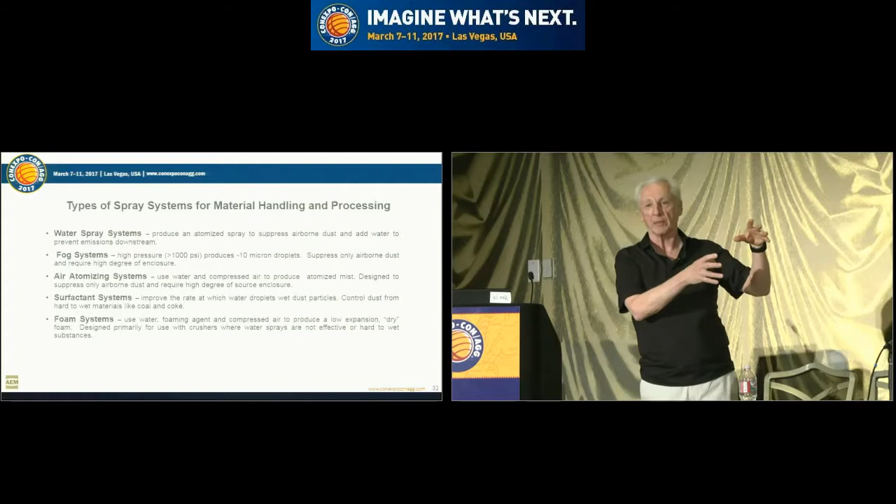So that when it reports to that scalping screen, you don't see any dust coming off that screen deck. With one of these fog systems, you can install that fog system on that primary crusher and it can do a real good job of knocking the dust down there. But now you're going to have to put those fog nozzles up there on top of that screen deck, because you didn't add any moisture back here to control dust up there. So with these fog systems and air atomizing systems, you've got to have nozzles at every source point, and that means a lot of nozzles and a lot of maintenance.

Surfactant systems, chemical systems, these are systems that use a wetting agent, basically a soap. The soap allows water to wet and spread more efficiently and more rapidly. And they were developed back in the 1950s for coal mining. Coal is a very hard material to wet down.

So when you got your water droplet here and your coal dust particle there, they collide, they come together. That water droplet can't wet down that coal particle. Water beads on a coal surface, just like trying to wet a Teflon frying pan. Water will just sit there in a little bead. And in this instance, that water droplet just bounces off of that dust particle. Can't wet it fast enough.

So these surfactants are added to water to increase the rate of wetting, so that when that dust particle and that droplet collide, because that surfactant's there, it can wet down that dust particle faster. And the Bureau of Mines did a lot of research in the 50s and 60s, and these surfactants could increase control efficiency of the water spray systems anywhere from 30 to maybe 50%. And they work well on hard-to-wet materials like coal, petroleum coke, sulfur.

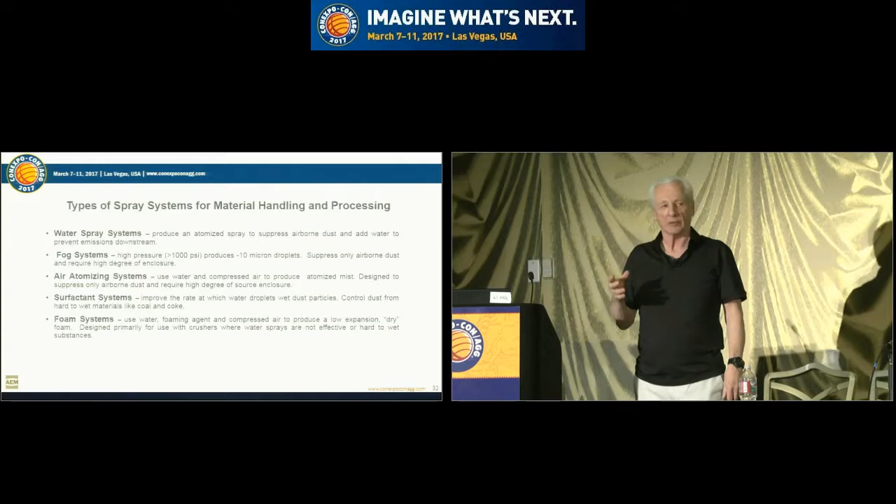So they were developed originally for these coal-fired power plants. The power plants loved them because instead of using 1% moisture, now they could get down to 0.1% moisture. And that foaming agent's an organic - it's got BTU value. So the utilities go to their rate commission, the state commission, and say, look, this thing is basically a fuel, we can pass that on to our ratepayer. So it really didn't cost them a dime.

You can't do that in aggregate. These things, you're probably looking at anywhere from 10 to 15 cents a ton to treat with foam. Again, I don't have any axe to grind - they work and they work well. I've seen some vertical shaft machines and some horizontal impactors where you just can't get water to work, and this foam may be the only way to go.

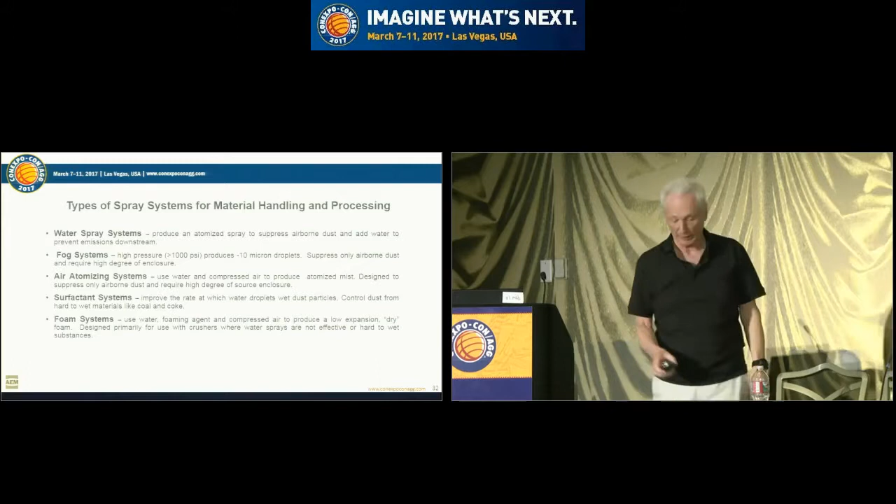But they're expensive and difficult to maintain because you've got to have just the right balance of water, foaming agent, and compressed air. If you don't have that precise balance, you're going to lose that shaving cream consistency. To tell you the truth, the maintenance is probably beyond the skill of most ordinary laborers, and most of you probably don't have enough people to maintain the production equipment, much less a spray system or foam system. But all this stuff works, and it's up to you to figure out which is going to work best for you.

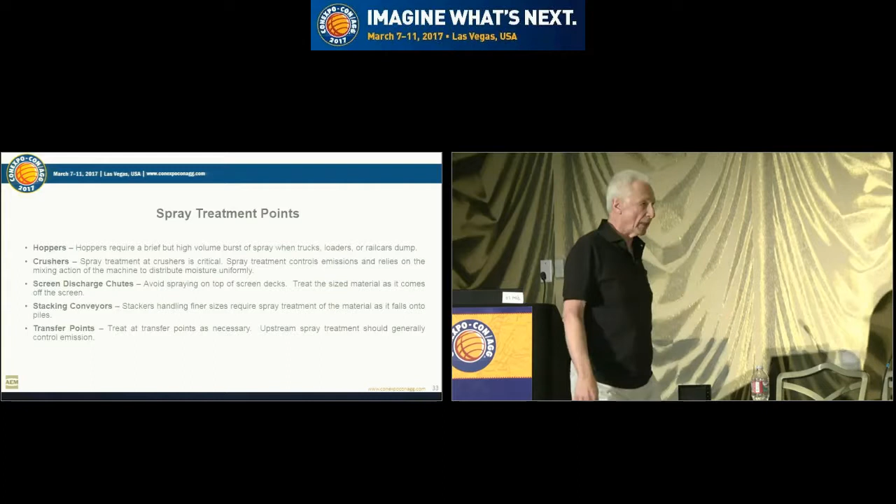Spray treatment points - I'm going to talk here primarily about conventional spray systems because that's what does the work in 90% of the quarries in this country. Where do you put spray nozzles? You put them in hoppers, because that's where trucks are unloading. You need to have some way to knock that dust down when they dump.

Crushers are very prominent sources of dust, so spray treatment at crushers are critical. Not only because they're prominent sources of dust, but crushers are great mixing devices. If you can get your water mixed in uniformly with the rock at the crusher, it'll report downstream to a screen, and if you've got just the right moisture content, you don't have to put any nozzles up on that screen - you may not even have to retreat it until you recrush it.

Screen discharge chutes - we don't put nozzles on screen decks. If you have dust coming off these discharge chutes when sized materials are reporting to a conveyor, put some nozzles there. Stacking conveyors.

If you've got a stacking conveyor that's handling a particularly fine product, like ag lime or something similar, you may want to put a spray nozzle out on the end of that stacker. And then transfer points - if you have a few transfer points that are still a problem, you might want to put in spray nozzles there.

But what I'm trying to do is encourage you to use as few spray nozzles as necessary, because that means less maintenance. I know there's some agencies that want you to put spray nozzles at every location, and that's the surreal world of plant permitting. I'm talking about the real world of plant operations.

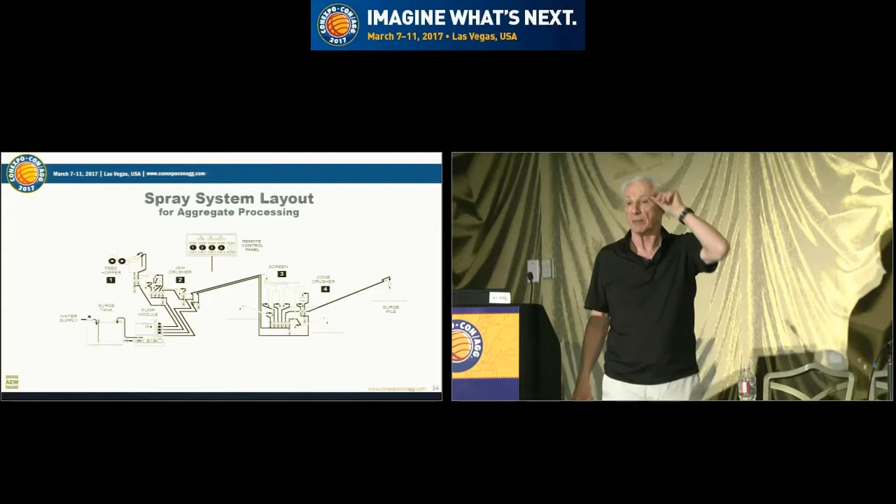If a hunk of metal gets stuck in that secondary crusher, nobody's got to go out there and turn a hand valve off, you just flip it off. If you've got a manual system, there's a Chinese fire drill trying to get that crusher back online, and nobody remembers to shut the water off. That keeps spraying, and now you've got puddles around the equipment, water on the belts, and it just creates a wet mess.

So for a large stationary plant, it would really pay to use a system that can be remotely controlled. You can tie these things into your operator's touch screen - they're real easy to automate.

If you're thinking about designing a spray system, number 1, you want to use high pressure. By high pressure, I mean 200 psi. That's about as high as you can go with conventional pipe and hose fittings. If you get much over a couple hundred psi, you've got to get into hydraulic hose fittings, and it gets a lot more expensive.

If you have a high pressure pump, you can size that pump to add a maximum of 0.5% moisture by weight. Our systems, for example, our pumps are sized to add that maximum amount of 0.5% by weight. This corresponds to about 20 gallons per minute per 1,000 ton per hour of process flow. We found empirically that if you add more than 0.5% moisture in a typical aggregate circuit, you're going to start seeing reduced screen efficiency, off-spec material, maybe problems with crusher wear.

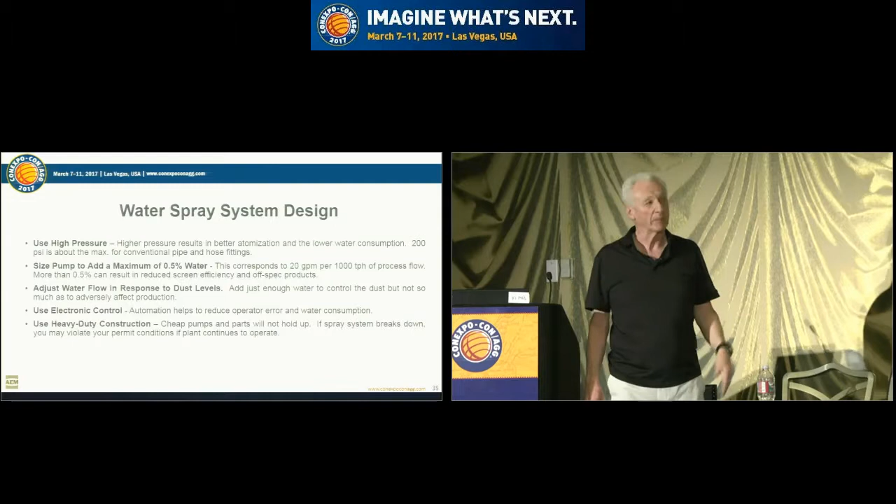You want to make sure that you've got a way to adjust.

Want to make sure you got a way to adjust water flow in response to dust levels, like on that slide I just showed you. That can be done electronically by bringing spray zones in or out of service, or by a guy on the ground who can open or close the valves for individual nozzles. Electronic control and automation helps reduce operator error and water consumption.

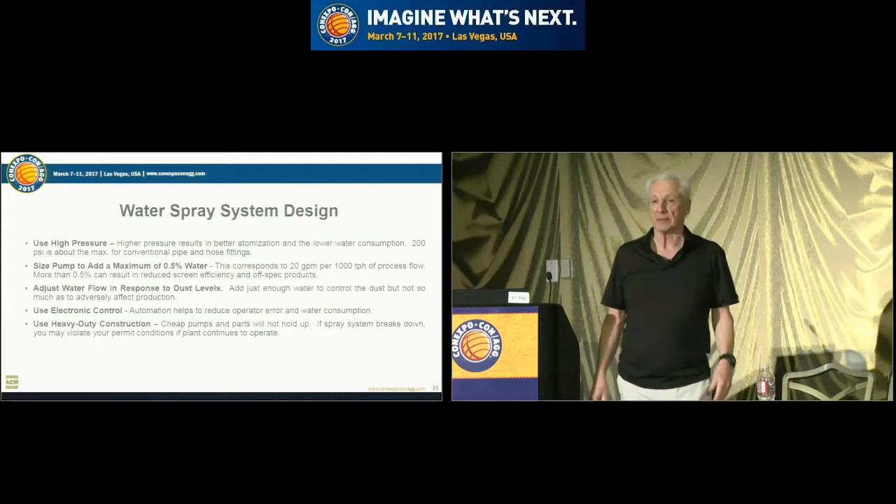Above all, if you're going to build your own system, please buy a decent pump. Don't get the Grainger catalog and buy the cheapest thing you can find. The biggest problem we see with these plant design systems is that they use cheap stuff that breaks down. And the odds are, if it breaks down in 6 months, the guy who bought that stuff and put it together might not even be there anymore. You don't know where he got that pump or this stuff. Heavy duty construction is really important. You don't want to create another maintenance nightmare, so make sure you get yourself a decent pump and use decent materials of construction.

Low pressure is a big problem. Low pressure pumps are cheap, but at low pressure you can't get atomization. If you're going to produce atomized water droplets capable of knocking down airborne dust, you've got to have pressures that exceed at least 150 psi. Because at lower pressure, you can make water droplets, but they're just too big. So you got a water droplet that's 1,000 microns in diameter, and here you got your little itty bitty 10 micron dust particle. When they come together, that little dust particle just streams right over that big old water droplet. It's like trying to hit a mosquito with a bowling ball. Can't do it.

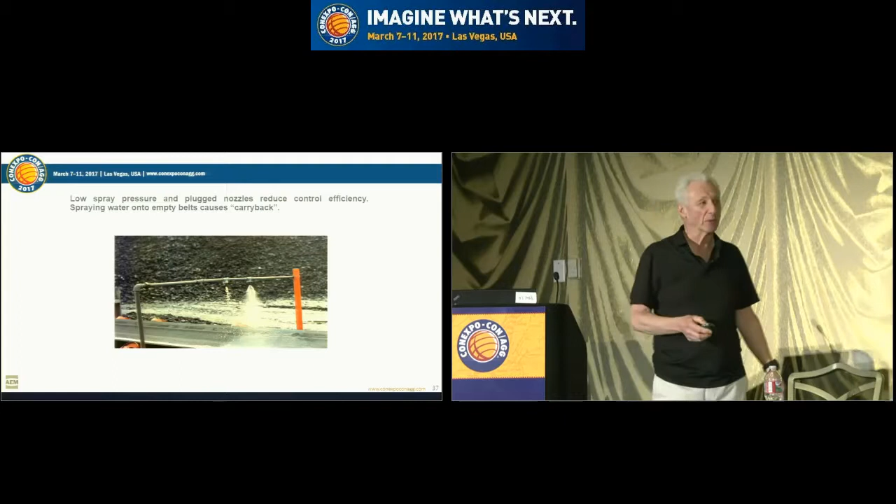High pressure saves water, that's the bottom line. You want to get your water consumption down, get your pressure up. At 200 psi, a high pressure spray system like this is going to add anywhere from 0.2 to 0.5% by weight moisture. You want that operator to be able to add just enough water to control the dust, but not so much that it's going to cause downstream problems.

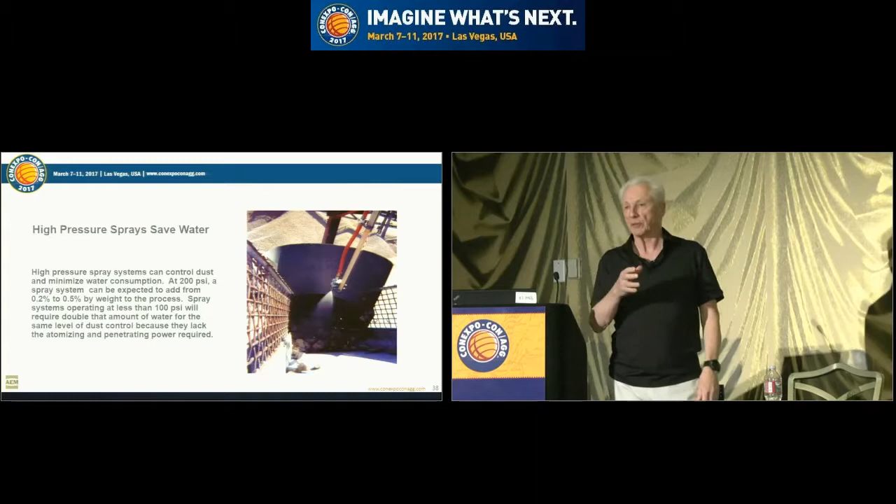I get into a lot of plants, and one of the first questions I'll ask a plant manager is whether there aren't just a few days a year, maybe a day or two after a rainfall, when the plant runs just right, when you can crush and screen and make all your products to spec and there's no dust. Probably 90% of the time I'll get a guy who says yeah. That tells me there's some optimal moisture content, a process variable, and if I can keep the stone at that optimal moisture content, I can process it without any dust and produce all my products to spec without any effect on screen efficiency. On the other hand, if he says 'I don't care if we get 4 inches of rain, this stuff is always making dust,' I'll say thanks for your time, you better get a bag house. But in most aggregate plants, anywhere from 0.2 to 0.5% by weight is all it takes. But you got to have an operator who knows how to use the thing.

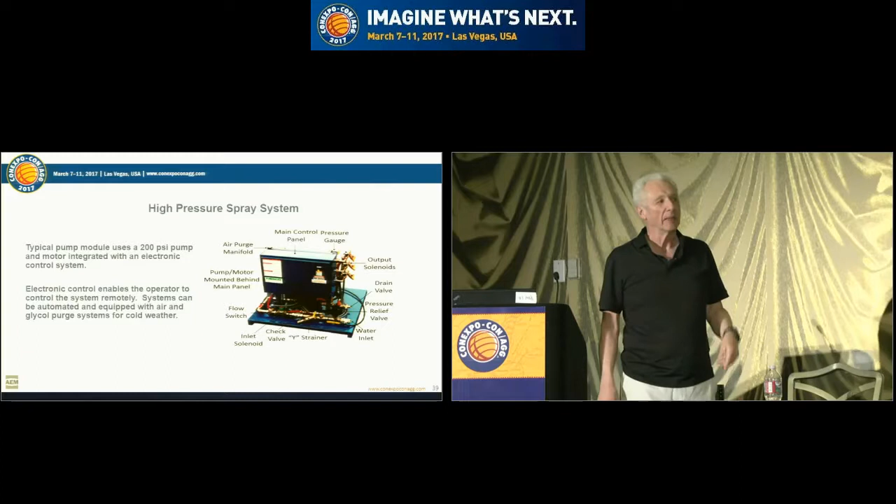Basically, just think of a pump. Let's say this is a 40 gallon per minute pump. You got a loop of water spinning around 40 gallons per minute at 200 psi, and then you're just bleeding off whatever you need out in the plant. Any water that doesn't get sprayed into the plant just recirculates back to a surge tank.

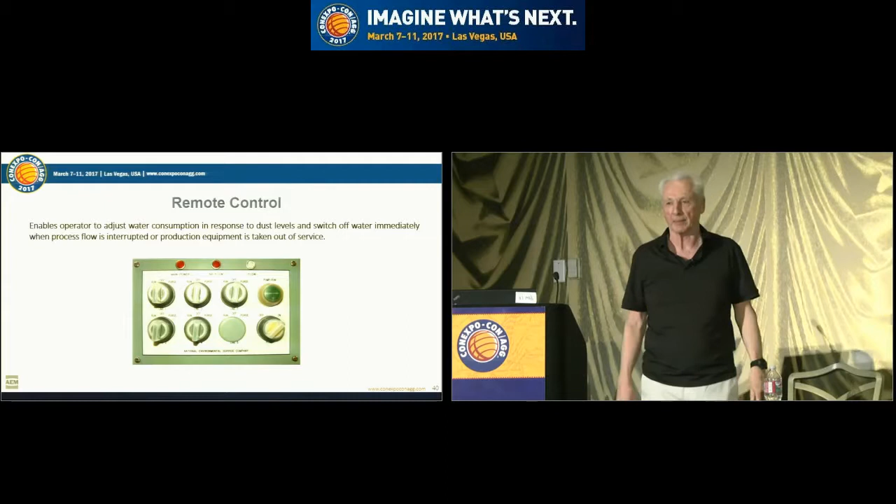Remote control, this is an example of a simple remote panel. Again, I only show it to you to encourage you to use electronic control. I see plants that cost $5, $6, $10 million, and they put in a jury rig spray system with a bunch of hand valves, and it just doesn't work because there's nobody on the ground. You got a sophisticated plant controlled by a computer. The same guy who controls the production equipment has to control the spray system because he knows what's on and what's off. Crusher breaks down, turn it off. Interruption in process flow, turn the water off.

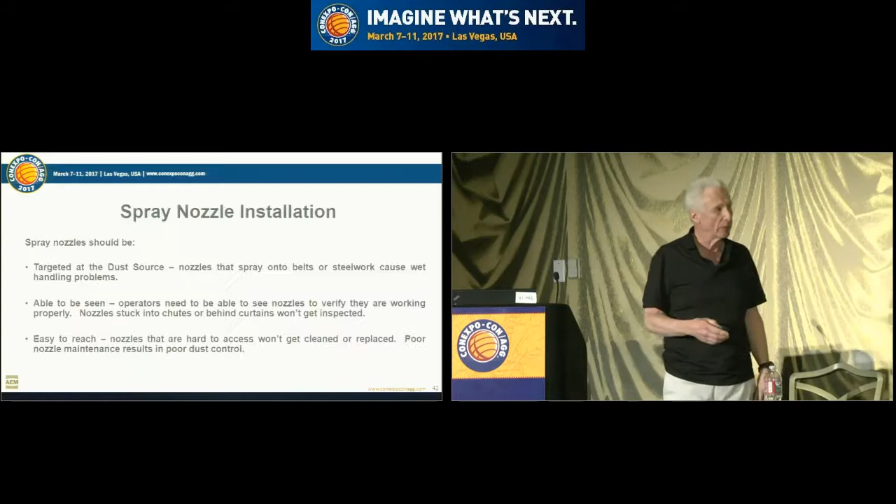Spray nozzle installation. Number one, they should be pointed at the dust source. That sounds like common sense, but nozzles that spray onto belts or onto steelwork are just going to cause wet handling problems. Like nozzles that spray right down over the top of the belt, that's no good. All that does is wet down the material that's on top.

When you got stone on the belt, as that material shakes over those idlers, all the fines are going to settle down to the bottom. So if you've got a spray nozzle spraying down on top of that belt, stuff on top is going to get real wet. That water is never going to get down to the fines that are down here. And when you throw that stuff up onto a screen deck, now you got the worst of both worlds. You got wet material that's mucking up the screen deck and dry material that's still producing dust. Even though you may be using the correct amount of water on a per ton basis, you don't have it properly distributed.

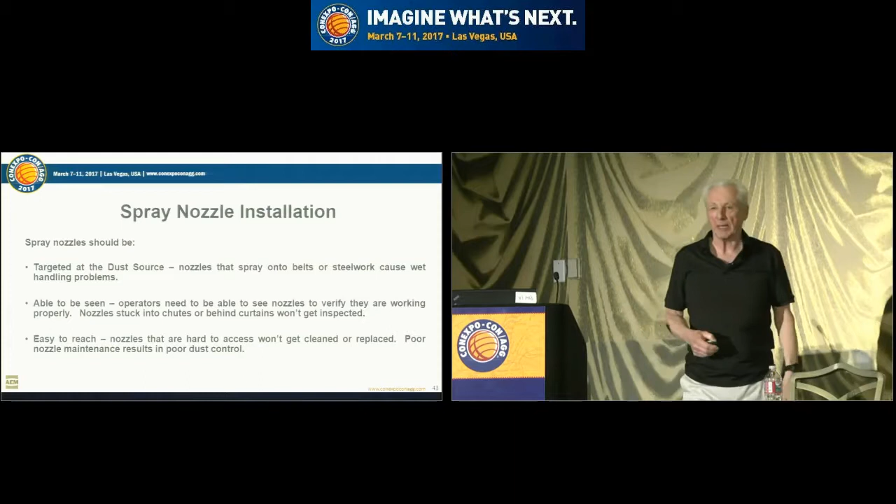Number two, they got to be seen. You got to be able to see these spray nozzles. If your operators can't see them, they ain't never going to change them.

Also, obviously easy to reach. If they can't get to them, they're never going to inspect them, and they're never going to clean them.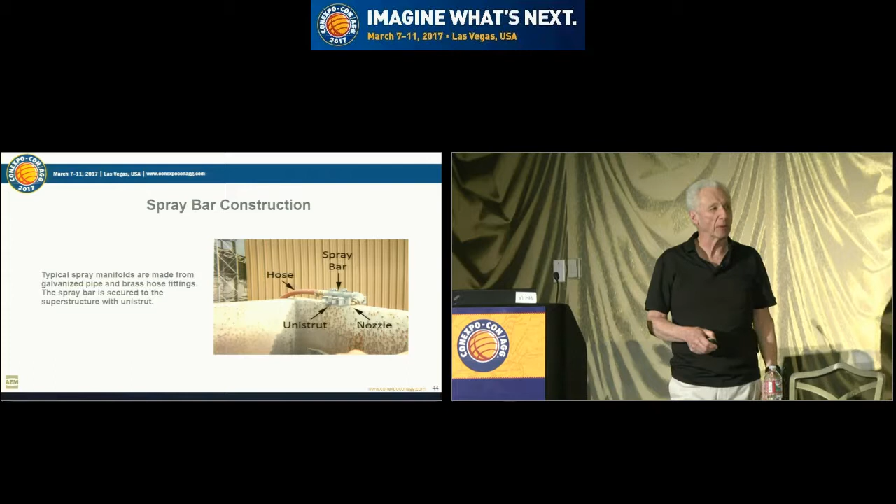So, spray bar construction, again, real simple stuff: galvanized plumbing fittings, some high pressure hose, a little brass spray nozzle, unistrut mounting bracket.

So make it easy to see. An operator ought to be able to stand there and see whether or not you got any water coming out of that nozzle. Nozzle pluggage - to tell you the truth, most of the nozzle pluggage problems we see occur from the outside in.

So what we recommend is to put in a dust curtain - put a little slot in there, locate the nozzle outside, so an operator can see the water coming out of that spray nozzle. That curtain protects the nozzle from all that blowback, making it much less likely to plug.

If you're pulling water and have a nozzle pluggage problem because you got sediment in the water, there's all kinds of filters and strainers you can use to take that stuff out. If you've got water that's susceptible to scale, call your Culligan man - there's all kinds of treatment options for hard, very alkaline water.

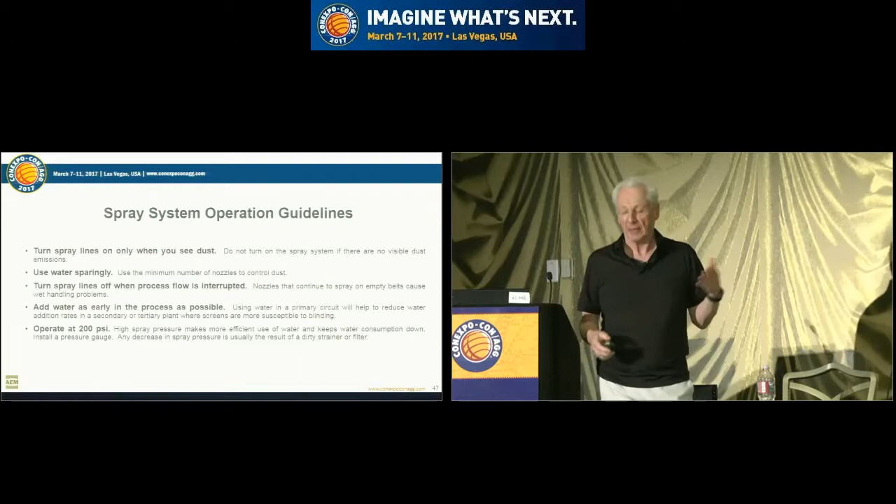So you've got to tell - it's not just the equipment, you've got to have an operator who knows what he's doing. Turn the spray lines on only when you see dust. Use the water sparingly, just enough to control dust, not enough to cause problems with screen blinding or belt carryback.

Turn the sprays off when the flow is interrupted. Don't leave nozzles running because then you get wet belts and carryback.

Add water as early in the process as possible. If you can water down your shot rock, for example, that's a great thing to do because that'll help you minimize dust at that truck hopper - you may not even have to use spray nozzles there. Adding water early on in that process can really help you control dust downstream.

Water you add in the primary circuit is really going to help you keep water consumption down in the secondary or tertiary plant. And again, you want to use high pressure.

Cold weather operation, here's a few guidelines. Install a thermometer which an operator can read so he knows when temperatures are starting to drop, so he can take action before things freeze up. You want to make sure you inspect those spray nozzles every day, and inspect that pump every day to make sure it ain't froze up.

We just did a job in New Jersey last November.

And these guys bought a shed, and I told them, you got to put a heater in the shed. Well, they don't have line power in there, they got a gen set, so they don't have power over the weekends. But they said they'd rig something up, and I must have sent them half a dozen emails saying don't forget to put a heater in there. Well, they didn't put a heater in there, and wouldn't you know it, that thing froze up over the winter, a brand new piece of equipment, and all the plumbing split, pump split, had to rebuild the whole dang thing just because they didn't put a heater in that shed.

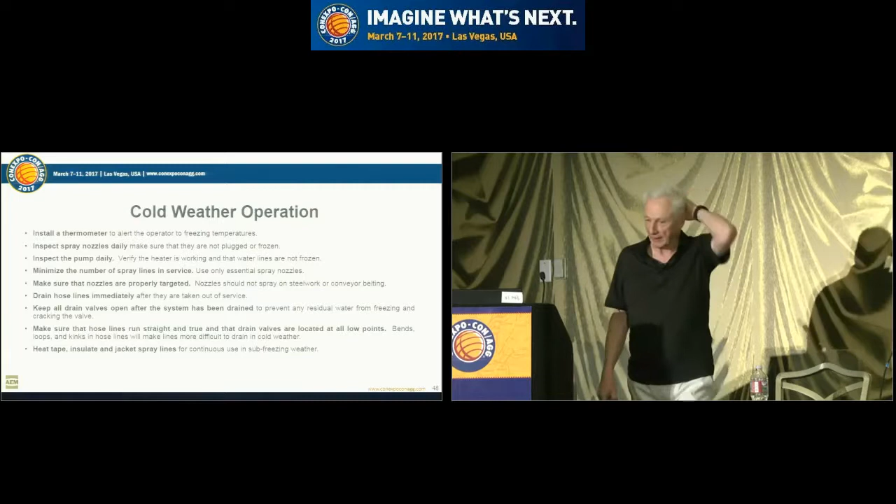If you truly need to operate continuously in freezing weather, really your only option is to heat tape, insulate, and jacket those spray lines.

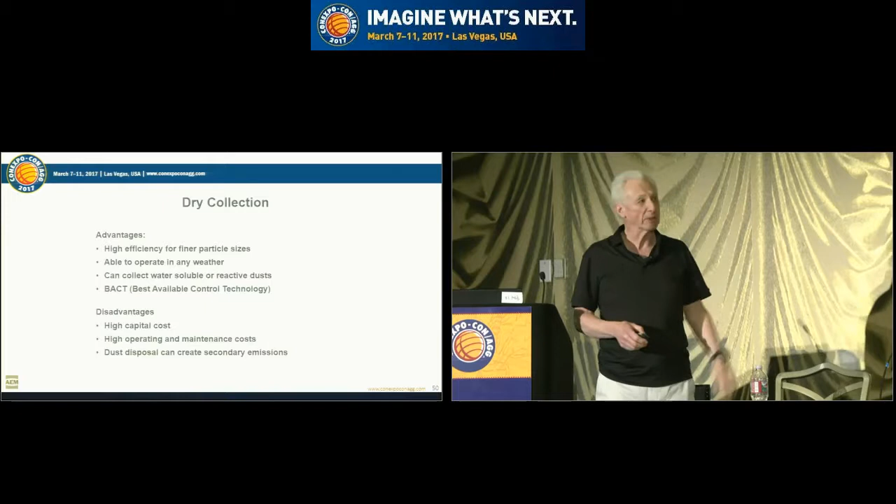Bag houses. When high collection efficiency on small particles is required, the most widely used method is a bag house - just a big old vacuum cleaner. Advantages: high efficiency for finer particle sizes. These can operate at 99.9% control efficiency. They can generally operate in any weather. And they can collect water-soluble and reactive dust that you can't use spray systems on. And they constitute best available control technology.

Disadvantages: high capital cost. You could spend 10 to 20 times the amount of money on a bag house that you would for a wet suppression system. High operating and maintenance costs, because instead of a 5 horsepower motor for a water pump, you got a 50 horse motor for the fan. And then dust disposal - what are you going to do with that dust after you collect it? You're going to dump it back into the process? Maybe you're just going to move your dust problem 1 or 2 transfer points downstream. You got to figure out what you're going to do with the dust once it's collected.

There are 3 major types of fabric filters or bag houses. I'm really only going to talk about this pulse jet. This is really the only one that's commercially significant anymore because they can collect and clean simultaneously.

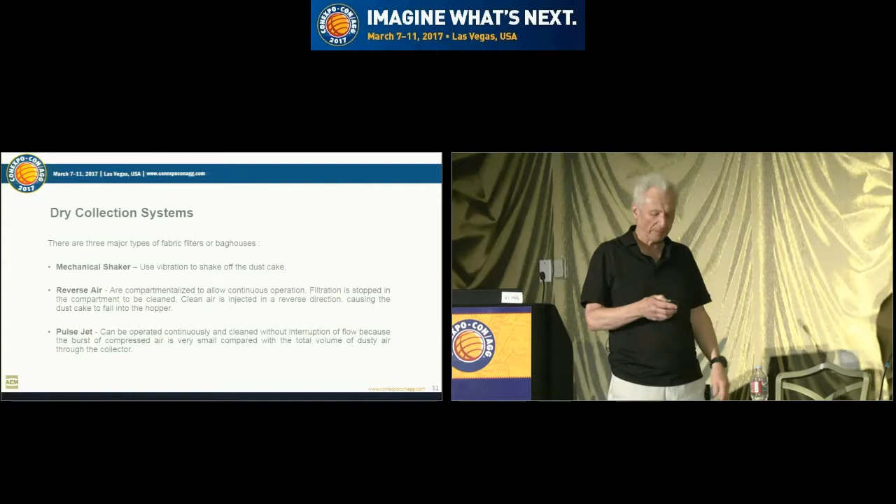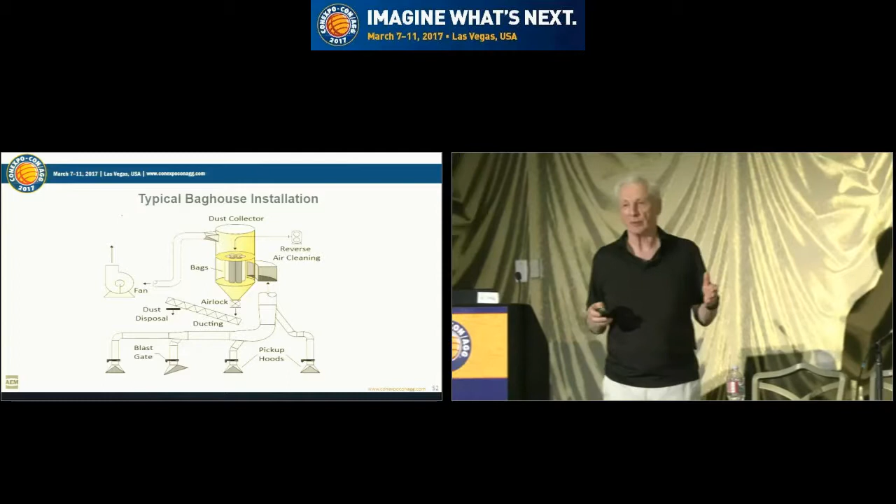Okay, one of the problems here is you've got to make sure that a lot of thought goes into putting one of these things in. Spray systems are a lot simpler. Here you've got a lot of engineering considerations. You want to make sure that you don't have too many pickup points because they're difficult to balance.

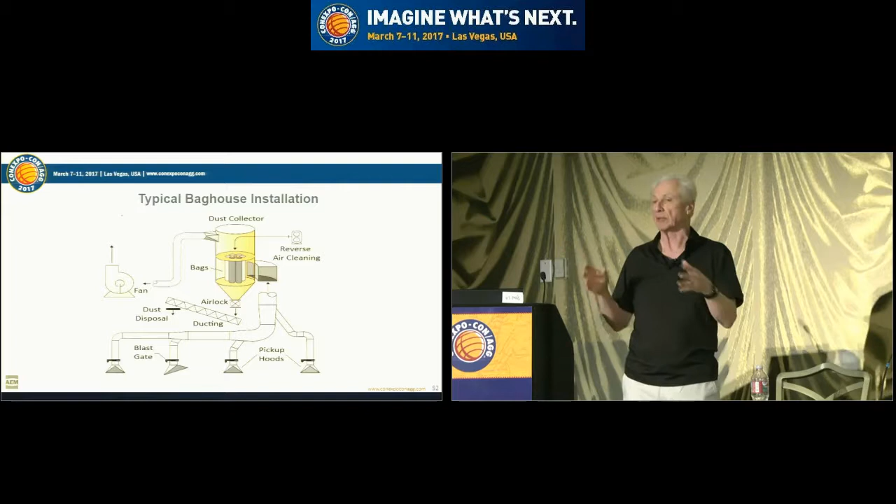I've seen plants where there's a screen tower over here that needs a bag house, and another one 80 feet over there that also needs a bag house, but I don't want to spend the money on two bag houses. I'm just going to get one big bag house, and like an octopus, run all this ductwork to both screen towers.

Well, that might work well for the first week, but very quickly the ducting gets out of balance. And once it's out of balance, it's almost impossible to get that system back into equilibrium, and it's not working efficiently. So selecting a dust collector can be a real chore, and you may have to go outside and get a consultant or a vendor who really knows their stuff.

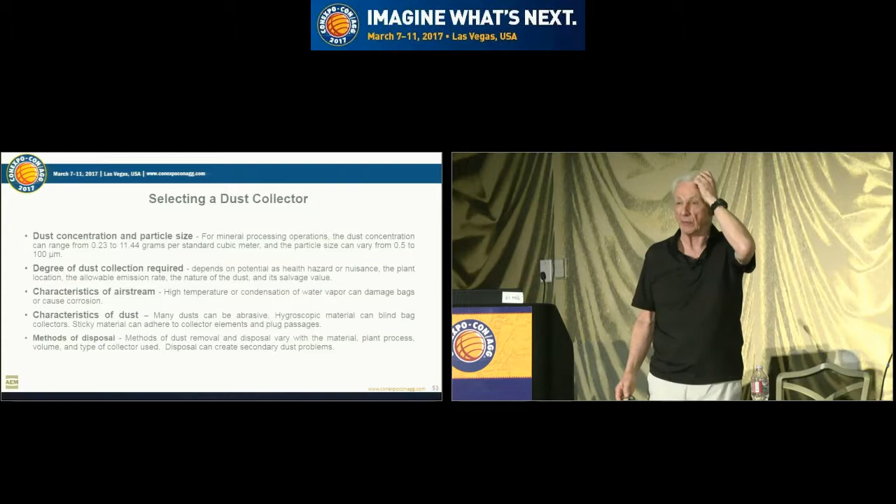You've got to take a look at the dust concentration and particle size. For a typical mineral processing operation, dust concentration can range from about 0.2 to 11 grams per standard cubic meter, a real wide variation. Particle size can vary anywhere from half a micron to maybe 100 microns.

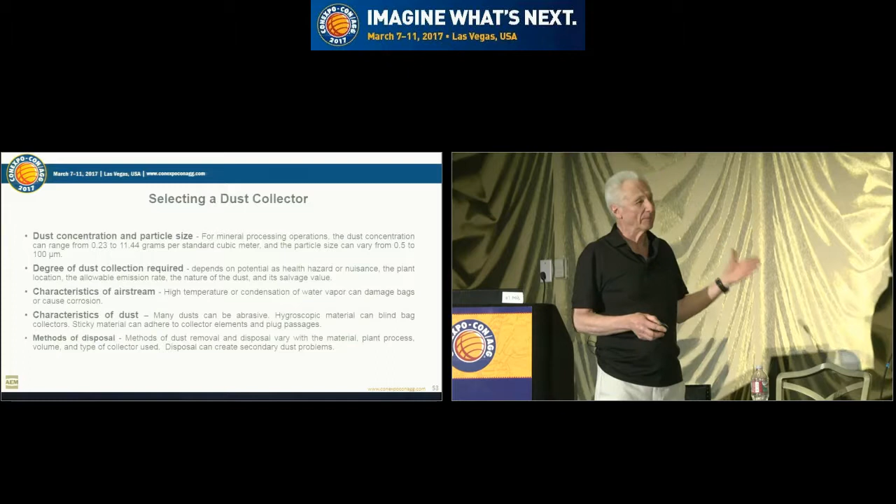How much dust, what degree of dust collection do you require? How efficient does it have to be? This depends on the health hazard of the dust, the plant's location, the allowable emission rate you're permitted for, the nature of the dust, and its salvage value.

Characteristics of the airstream: are you going to be handling something high temperature or corrosive? What are the characteristics of the dust? Do you have any clay in your rock that's going to make that dust sticky? That material can adhere to collector elements, your fabric filters, and really plug these passages and disrupt the collector's efficiency.

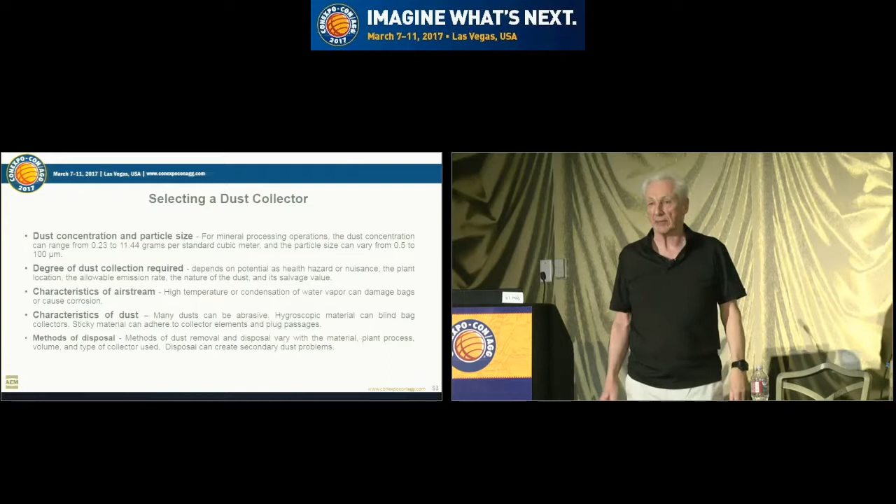And again, it's a matter of cost. I really should put in a 50-horse fan, but things are kind of tight, and I can get a good deal on this 30-horsepower fan. That's fine, but just remember, you're going to have to put up with this stuff.

Sharp bends in ductwork: putting in a 90-degree bend is pretty cheap. It's a lot cheaper than making a nice, smooth 90-degree bend. The problem with that sharp bend is that dust is blown, it's in the air...

coming through that duct at high velocity. Those particles hit that wall and start to wear it out. Two months, six months down the road, now you've got a hole in your ductwork. So you want to try to avoid sharp bends.

And then, like I referred to earlier, too many pickup points just makes it impossible to balance out these flows. And that's what makes them particularly difficult to use in an aggregate plant, because you've got so many sources in a typical material handling system.

Okay, if you remember nothing else from today, remember this: once you find dust controls that work, keep them working. Most of the violations, probably 90% of the violations that we see, are not because they haven't installed the right kind of equipment, it's because it hasn't been maintained.

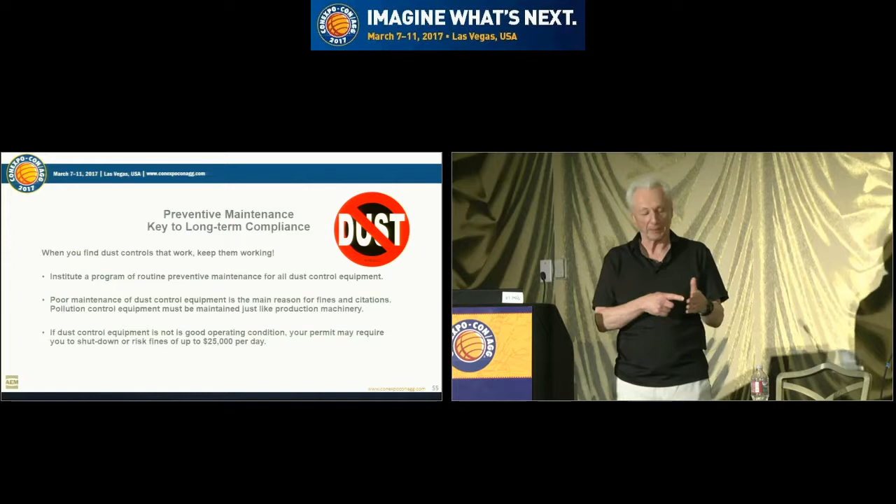Spray system breaks down, baghouse system breaks down, the inspector comes in and says, that pump ain't working. And your permit stipulates that pump has got to be capable of operating whenever the plant's in operation. So you've got to make sure the dust control equipment gets the same kind of maintenance that your production equipment does. Good dust control, good process control.